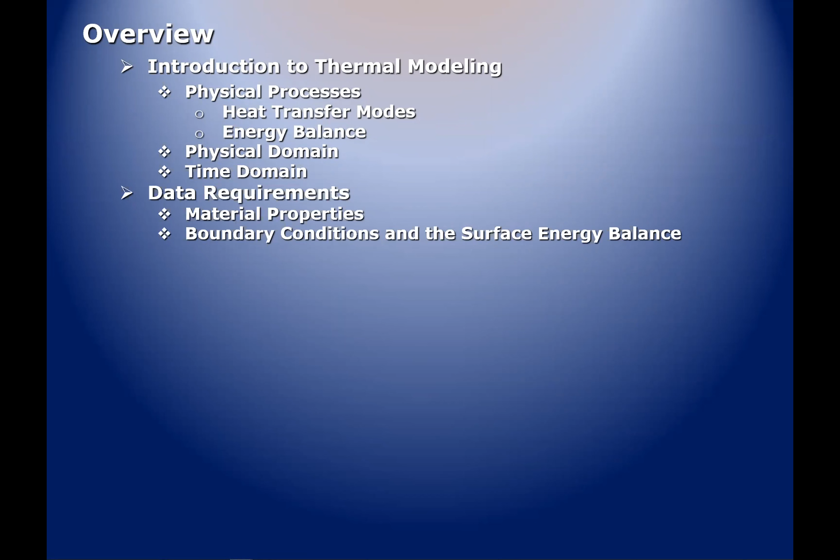Then we'll move on to data requirements. This is important from the designer's perspective, because you can't send a consultant off to do modeling without the appropriate background information, and sometimes that can take quite a bit of effort to acquire. Both material properties and meteorological data may be needed if you want to do a comprehensive modeling study of a particular site or portion of the roadway you're designing.

We'll talk about a couple different versions of modeling that are available, starting with some analytical modeling, which may be appropriate for simple analyses, including the basics of the Stefan and Neumann curve solutions, and then one method that has been a standard DOT has used in the past, known as the modified Berggren method. I'll talk a little about the background there.

Then we'll move on to numerical modeling, both 1D and 2D. I won't talk much about 3D models, other than when they might be appropriate, although those are typically difficult to complete and very time consuming. We'll talk a little about modeling advection or convection, such as occurs when you have groundwater movement, or particularly air movement in an ACE embankment that Billy mentioned in the introduction.

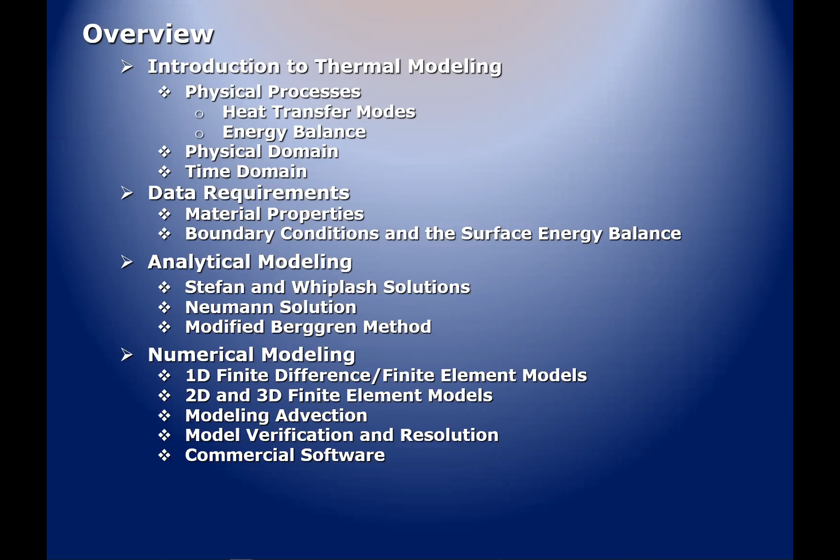And then questions about verifying software results and resolution, and I'll mention briefly some commercial software that has been looked at. And then finally, some real world challenges: materials and uncertainty in boundary conditions and initial conditions.

So a quick background in terms of thermal modeling. These are the three fundamental physical processes that one has to be concerned with when modeling heat transfer in a roadway embankment type situation.

Typically, heat transfer in soil and gravel systems is dominated by thermal conduction. Exceptions do occur, as I mentioned briefly, when you have a moving fluid like pore water or potentially pore air in the case of an ACE embankment, and that can complicate the modeling tremendously. Most of the simple methods and most simple numerical codes typically use thermal conduction as the primary heat transfer mechanism in soils, sands, and gravels, and that's largely acceptable and accurate, again excepting only those conditions when you have some sort of moving fluid to deal with.

In addition to thermal conduction, there are two other fundamental heat transfer mechanisms that have an impact, and that is thermal convection at a surface and also thermal radiation. In this slide, the convection and radiation terms are really in the context of a surface interaction. So for instance...

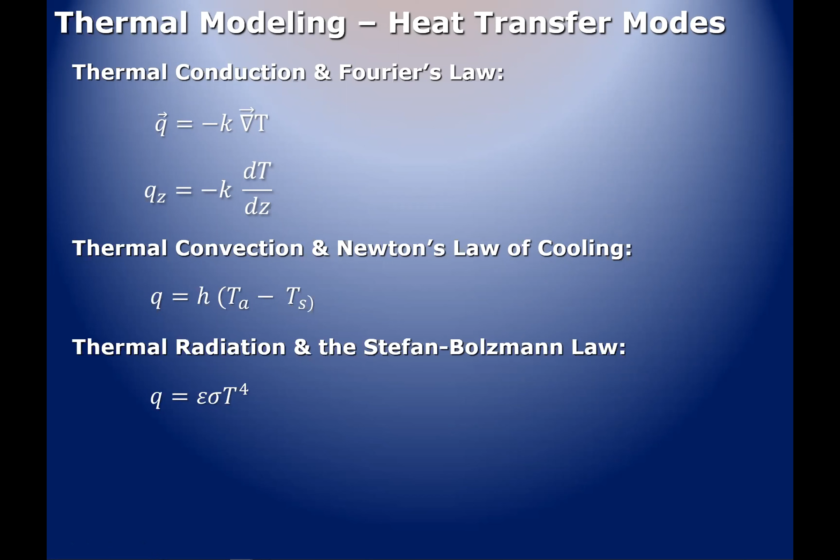Obviously the larger the net heat flux, the larger the change in temperature is going to be. The larger the heat capacity, however, the smaller the change in temperature will be. Heat capacity is just the physical measure of how efficient or effective the material is at absorbing thermal energy. Something really effective at absorbing thermal energy may take a lot of energy without changing temperature very much, so it's sort of like a thermal battery.

The ability of materials to store heat is really a function of 2 types of heat capacity: a sensible heat capacity and a latent heat capacity. Sensible heat capacity is associated with raising the temperature of the material, whereas latent heat capacity is energy associated with either freezing or thawing the material. If we're considering a soil matrix with moisture in it, both the water and the soil particles can change temperature, so they both have sensible heat capacity. But only the water in the matrix can freeze or thaw, so only the moisture portion has latent heat associated with it.

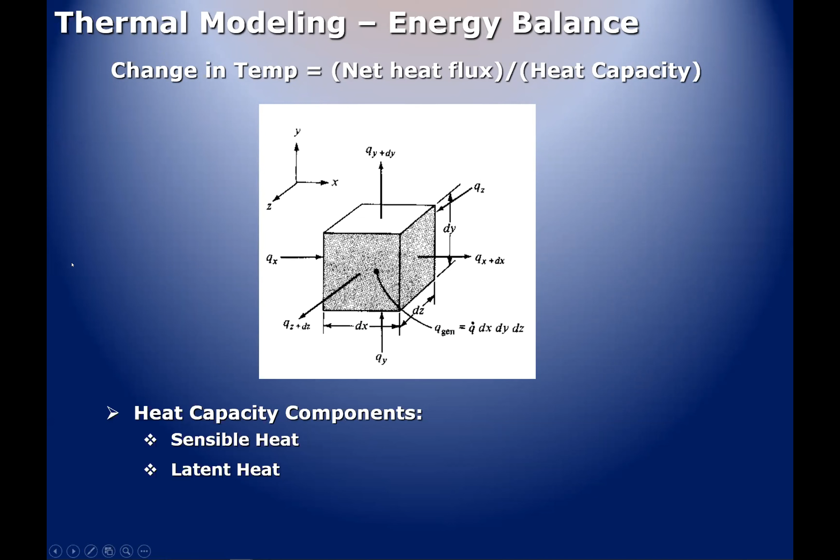So the fundamental background of modeling is that you take those heat flux relations, like Fourier's law of heat conduction, carve out a representative volume of the material, and perform a balance on it. That results in a set of equations that you can solve for the temperature of these control volumes as time goes on.

Depending on the result you're trying to achieve or the analysis you're trying to obtain, it may be most advantageous to conduct a simplified one-dimensional simulation. For the most part, roadways are represented by two-dimensional geometry. Typically, if you look at the importance of heat transfer in the various directions, the most important and most vigorous heat transfer occurs in the vertical direction.

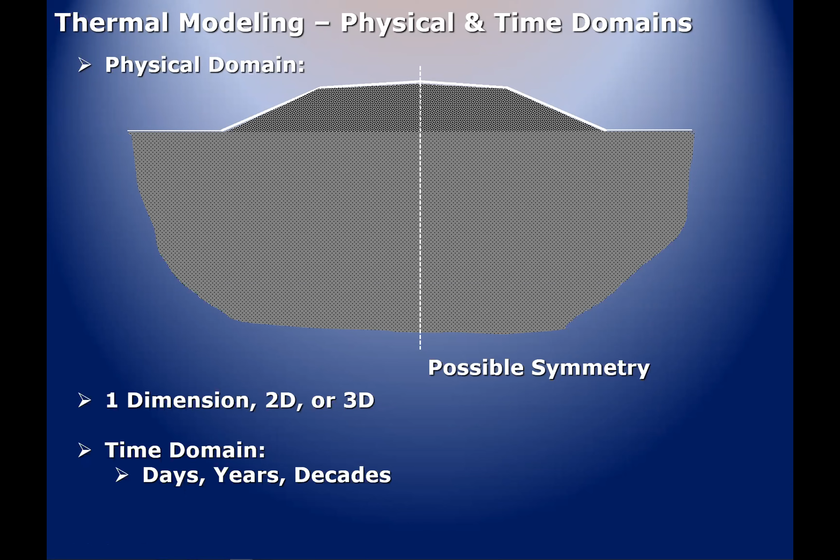If you have good information on dry density and moisture content, coming up with thermal properties is relatively straightforward. But that's something the designer has to think about: what types of material properties are really available, and whether we need to do more sampling of the site, because these material properties are needed not only for the embankment materials, but also for the underlying foundation soil materials.

Once the soil dry density and moisture contents are known, sensible and latent heat capacity calculations are relatively straightforward. Modelers can easily calculate that, so long as they have an idea of what types of materials are within the embankment prism and below it, and what moisture situation you're dealing with.

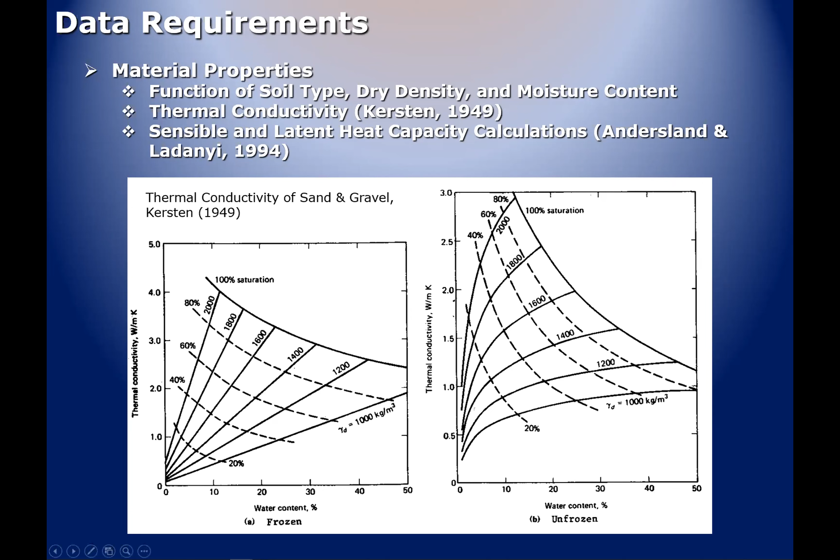The other set of data requirements has to do with boundary conditions. The most complicated boundary, of course, is the upper surface boundary. Here's where some of those heat transfer mechanisms I mentioned earlier play a huge role. Probably the combination of radiation is the most difficult to deal with.

Hot objects generate shortwave radiation, so from the sun we have incoming shortwave radiation. Some of it may be reflected by clouds, and some reflected once it hits the surface, but quite a lot of it will be absorbed. If you have a black asphalt coating, for instance, we all know that a hot summer day will generate quite a bit of heat as the sun's shortwave radiation is absorbed by the asphalt.

On the other hand, the asphalt also emits longwave radiation. So there's a complex play between incoming radiation from the sun and outgoing radiation from the surface of the roadway that results in what I'll just call net radiation - a balance between what's coming in from the sun and atmosphere, and what's being emitted by the surface of the road.

In addition, we also have the convection term I talked about before. For instance, if you have a lot of sunlight on a very warm day, you may have very high asphalt temperatures. But if you have a cool breeze, that wind will carry away a lot of the heat, so it may not get into the embankment or underlying foundation soil.

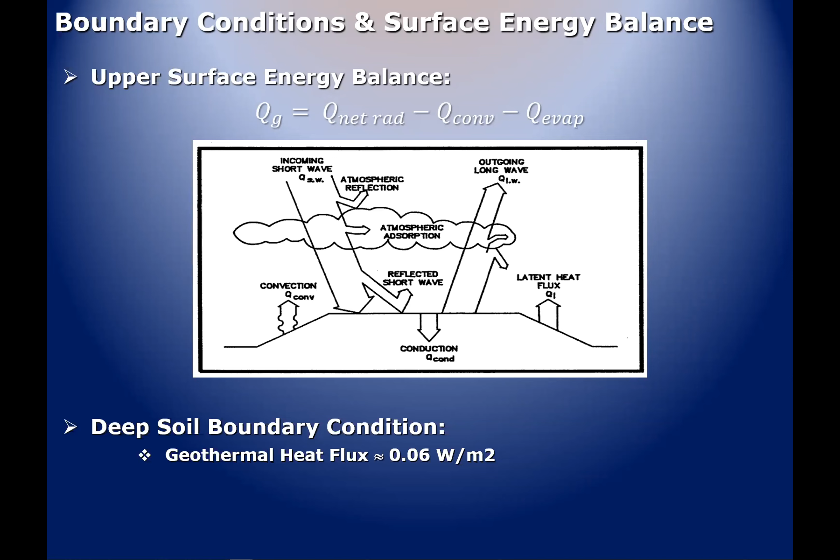However, you'll find that most of the time you won't have enough data on the surface energy balance, and most of the time the accuracy you need won't justify either gaining all that meteorological data or using it in a modeling effort. So most of the time, modelers will use a simpler surface energy balance approach known as the N-factor approach.

Many of you may have heard of this. Most of the time, modeling efforts will use freezing and thawing N-factors to characterize what's going on at the surface of the ground or the surface of the embankment.

I won't say a lot about these, but essentially the N-factor is a way of converting air temperature conditions to surface temperature conditions, using an air freezing index, for instance, on the freezing side. Knowing an air freezing index, which is the number of degree days below freezing that the air temperature maintains, and a freezing N-factor, we can calculate what's going on at the upper surface of the embankment or soil.

The same thing is true for the thawing season. Knowing the air thawing index and the thawing N-factor, we can calculate what's going on at the surface. You can imagine that for an asphalt surface during the summer, because of solar input, as we discussed before, you'd expect higher temperatures at the surface of an asphalt layer than for just the surrounding air.

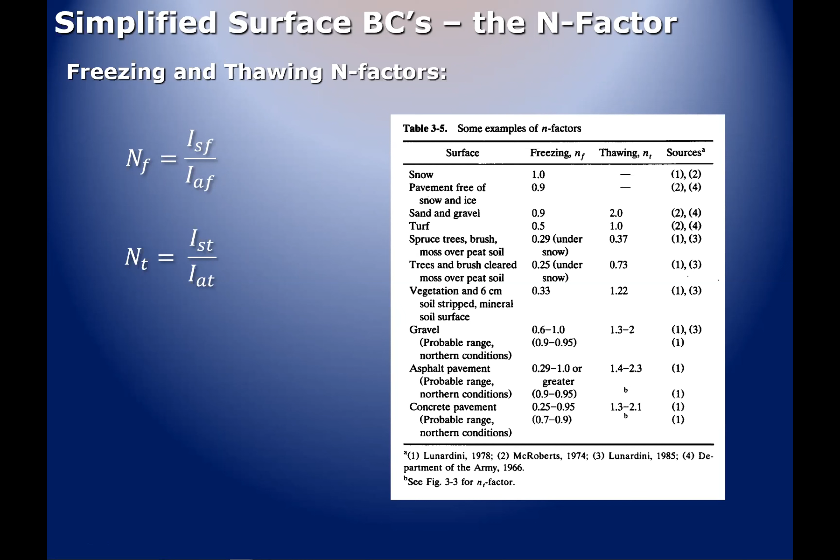So let's move on and talk a little bit about some simple modeling techniques. The first solution I'll talk about, which you've all seen pictures of, is something known as the whiplash curve solution. In this case, it's just a one-dimensional solution.

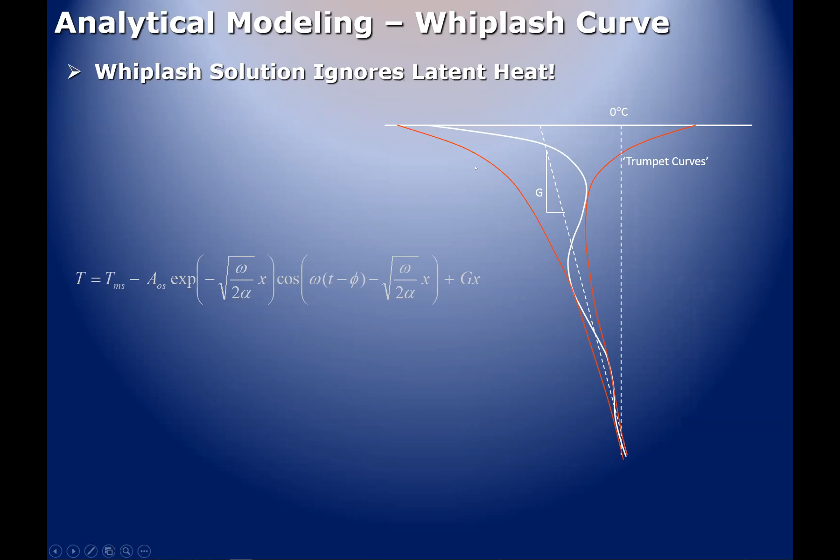So there is a mathematical solution so long as freezing and thawing are not important. The only time freezing and thawing aren't important is if there's essentially no moisture in the material. So for very dry materials, perhaps a dry bedrock, something like that, the whiplash curve may give you reasonable results in terms of annual behavior of the temperature profile.

Another extreme is known as the Stefan solution. Whereas the whiplash curve solution ignores latent heat, the Stefan solution ignores sensible heat. It essentially assumes that the material is not changing temperature, it's only freezing or thawing. Based on that assumption, you can come up with a relatively simple estimate of either the freeze or thaw depth.

So if it's a very wet material you're dealing with, for instance water, the Stefan solution can give you a pretty good estimate of, for instance, the depth of ice formation on a lake. Because the amount of energy removed from the surface of the lake to the ambient air, almost all of it goes to creating ice, very little of it goes to cooling off that ice. So the Stefan solution is a pretty good solution if you have a very wet material, or you're dealing literally with 100% water.

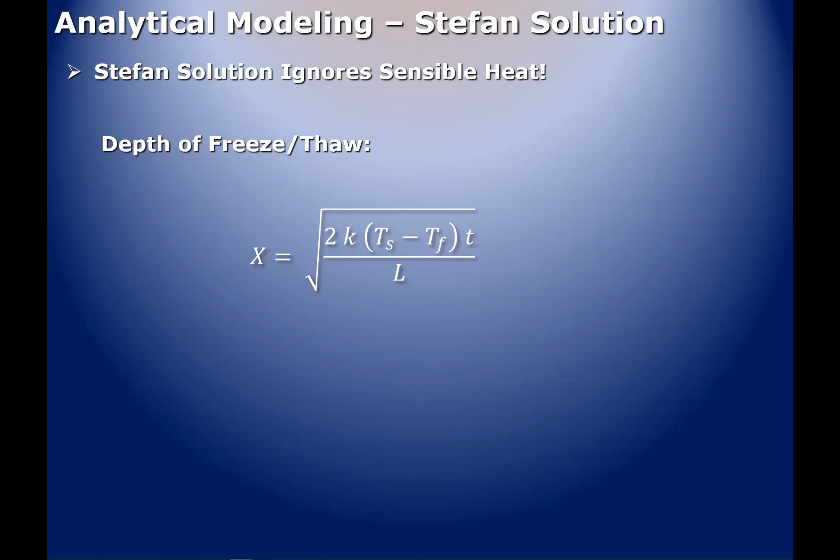Neither of those approximations are typically true for soils. Most of the time you have some water, not zero and not 100%. So most of the time for soil modeling or embankment modeling problems, both the latent heat and the sensible heat play an important role.

There's one analytical solution known as the Neumann solution, which actually includes both. It's very complex mathematically, involving the use of an error function, which arises from mathematical theory for solving these equations. It's also relatively simple in that it assumes the initial soil column is all at one temperature, say T0, maybe above freezing.

At the beginning of time, we suddenly lower the surface temperature to some fixed value, T surface. As time progresses, since the surface temperature is below freezing, you get a freezing front progression with time. The Neumann solution can tell you exactly what these temperature profiles look like, but only for the simple case where the surface temperature is fixed.

Which of course is not what we have in the real world. Typically temperatures vary from hour to hour, day to day. In wintertime generally they're below freezing, but not fixed like this. So the nice thing about the Neumann solution is that it can be used to verify numerical models that include freezing and thawing, making sure your numerical model captures all the important parts of these problems.

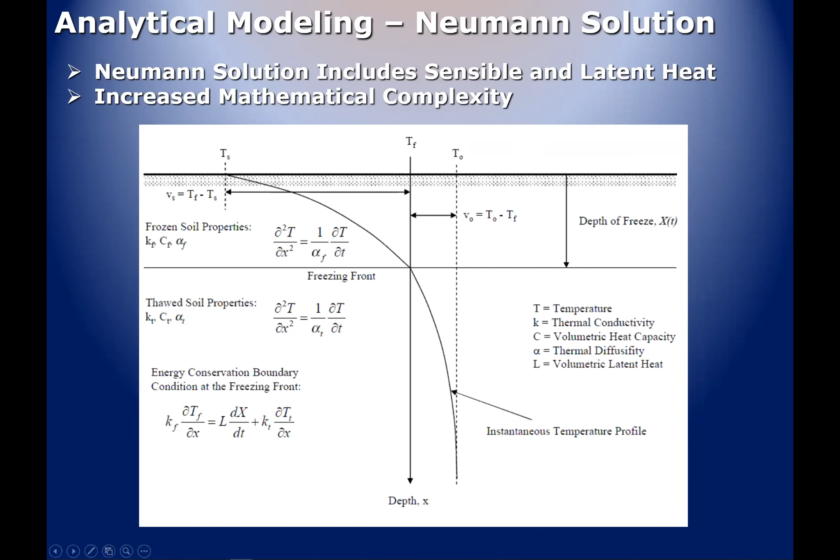The one that's been practically used by DOT in the past, and maybe after I'm done Billy can chime in on whether this is still available - I know for a while DOT had a program called ModBerg. The modified Berggren method is essentially a layered version of the Neumann solution.

It does include both sensible and latent heat, so cooling and warming of the soil, and freezing and thawing. It's used for calculating freezing or thawing depths in layered systems like you have in a roadway embankment problem - gravel, D1 gravel, silt layers, etc., maybe even an insulation layer.

So it's well suited for roadway embankment problems, and it can be implemented in a spreadsheet. This would be a relatively simple modeling effort that a modeler or consultant could do quickly, if all that's needed is a freezing or thawing depth analysis, and you and the modeler are convinced that a one-dimensional analysis is appropriate for the conditions.

For instance, you're not worried about what was happening at the center line versus what might be happening at the toe of the embankment slope. That would probably dictate a two-dimensional analysis.

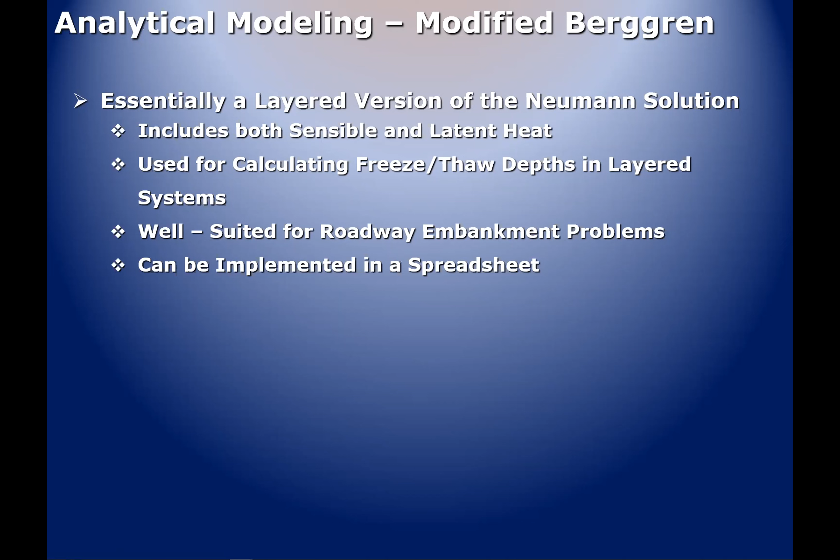Moving on to numerical modeling - I've got just a couple more slides left, so we're getting close to the end. Numerical models are available in 1, 2, and 3 dimensions.

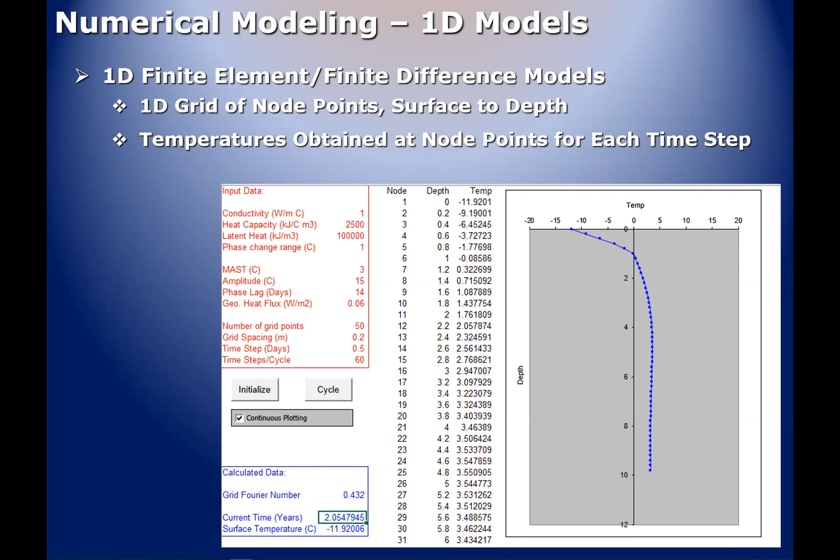These models can include detailed thermal properties, boundary conditions, and initial conditions. As I said earlier, the commercial codes even include the ability to do a full surface energy balance if you have the data to support it.

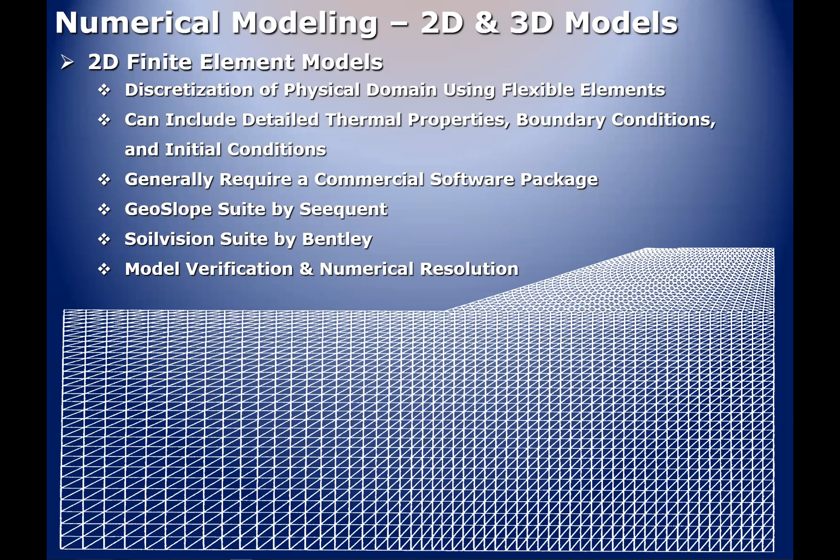If there is important advection going on, you not only have to solve for the temperature field within the embankment and underlying soil, but also for the motion of the fluid. That is challenging. It can be done by both SoilVision and GeoSlope's TEMP/W, but it requires additional information about the material properties and the potential driving the fluid motion. So that's a real world challenge for sure.

A second challenge is accurate knowledge of material properties and possible heterogeneity of the materials, as well as the fact that moisture contents may change over the annual cycle. Really accurately characterizing materials is a big real world challenge, and if you're way off on material properties, you'll likely be way off on temperature predictions and freeze-thaw predictions.

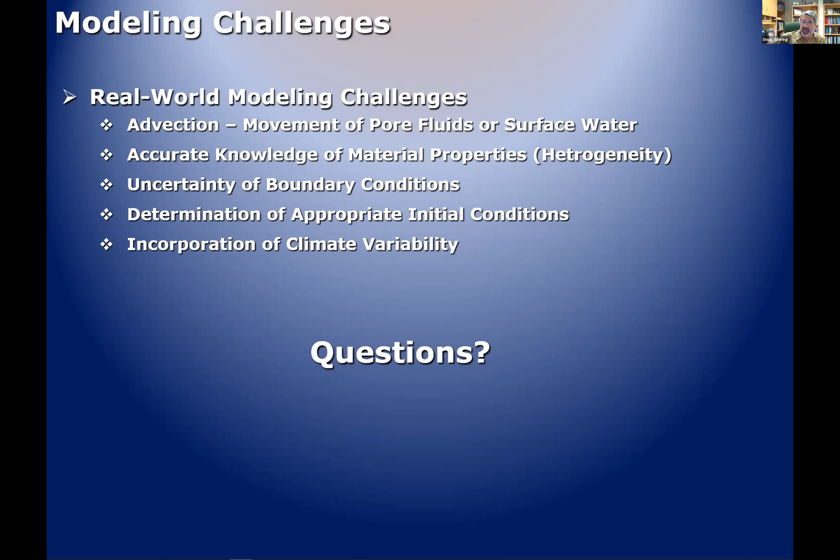Well let me just say, as Billy said at the beginning, I'm here in Fairbanks. I'm retired. I'm happy to connect with any of you who have questions about Chapter 4 or about thermal modeling. Please reach out and feel free. Thanks. Okay, thank you, Doug. And as Doug says, he's certainly available to you if you need, and he does occasionally do projects for DOT. I think he's got one going now on ACE.

Uh-oh. You clicked off for a second, Billy, but I can hear you now. How about now? Yeah, you're kind of... I got to restart. Okay, am I back? Doug, can you hear me? Yeah, you're back. Okay, some reason or another my Zoom decided to quit me.

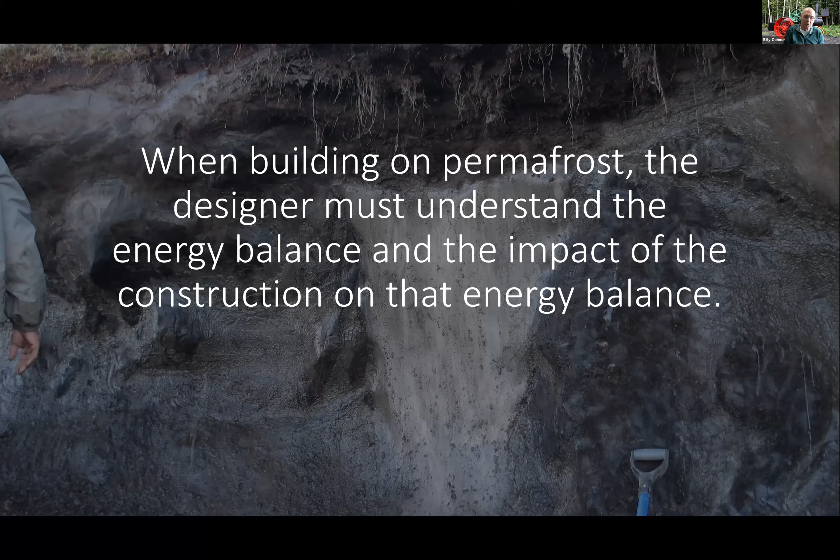So Chapter 5 is really talking about design alternatives. I'm not going to go into great detail on all of these, but I'm just going to give you a sense of some of the options available to you, perhaps when you might want to think about using those techniques, and when you may possibly even want to avoid them. There really are only a few options that are available to you.

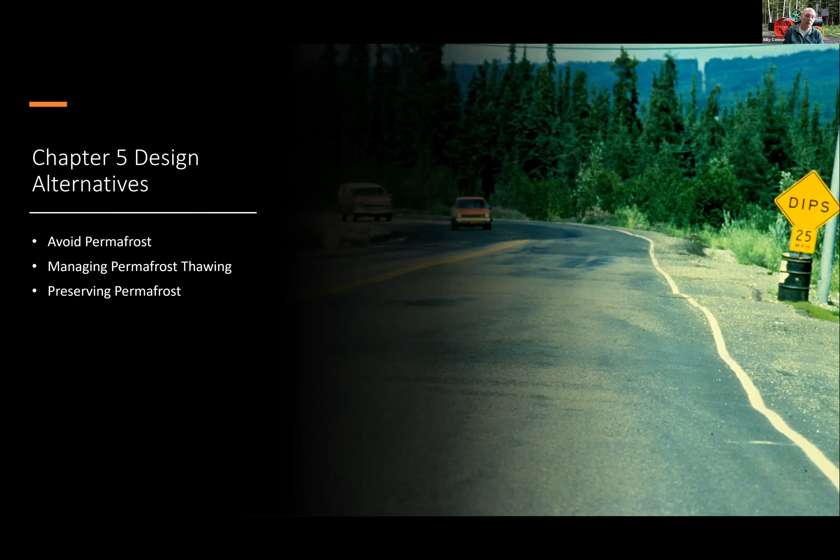One is to avoid the permafrost altogether, which is probably the best one. You can also manage the permafrost thawing in several different ways, or you can try to preserve the permafrost. We'll be talking about each of these in a little more detail as we go along. Which one should you choose of those three?

Well, the policy of the Alaska DOT, going back to the 1900s actually, has been to avoid permafrost whenever practical. Fully recognizing that there are competing requirements such as grade, sight distances, and all of those kinds of things. But when you can, try to avoid it.

Managing the thaw is attractive in warm permafrost, such as around the Fairbanks area and south, pretty much anything south of the Yukon River on our primary network. That is a good choice, where the mean annual surface temperature is above freezing.

Doug talked a little bit about the surface temperature and how you might get to that. But it's important to recognize that if you're in those conditions, and especially when you start adding the increases in temperatures we're seeing in our climate these days, when you're at or near that point, you probably want to really start thinking about managing your thaw.

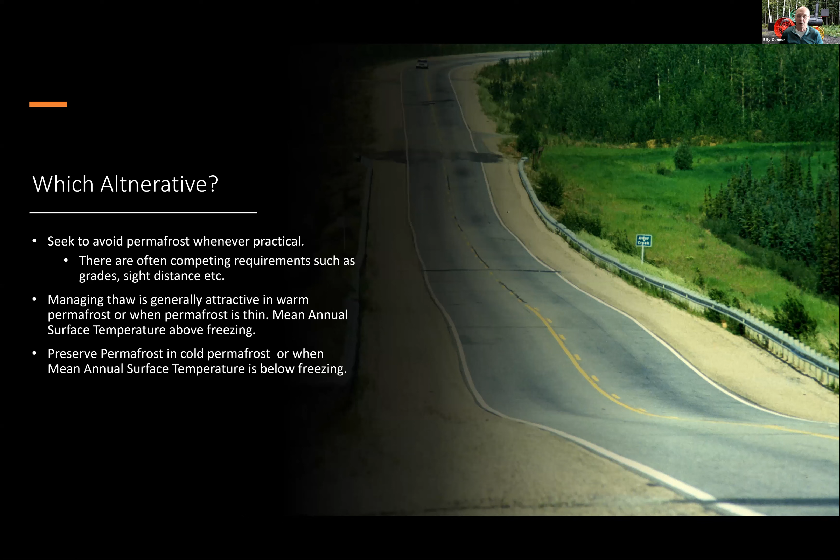And then preservation of permafrost—anytime you're in cold permafrost, or when the mean annual surface temperature is below freezing, that may be a point in time when you can consider trying to preserve the permafrost. Again, we'll see in chapter 10 that the climate is changing, but hopefully in that chapter you'll start getting a sense of what tools are available to take that into account.

Avoiding the permafrost is not a new concept. When the Richardson Highway was realigned during 1910, Wilds Richardson was in charge of that, and that was a primary consideration. Wherever they could, they went out of their way to try to avoid permafrost, recognizing that if they didn't, it was going to be problematic for some time to come.

In the 1900s, when the Alaska Road Commission was established, they also put it in their policy that they would avoid permafrost whenever practical. It was written policy, and for all practical purposes, I guess we could say that's still very much in effect.

One of the things I'm seeing occurring more and more is the desire to upgrade our roads and airports, and try, in many cases, to look at relocating those. Just be careful when you do so that you do it with forethought, especially if you're moving off of low ice content, no permafrost, into permafrost—you may want to carefully think about that and the impacts it may have.

In general, if you're building on stable permafrost, and there's a little bit of discussion about that in chapter 2, that's probably going to be okay, but make sure you really know what you're getting into as a part of that.

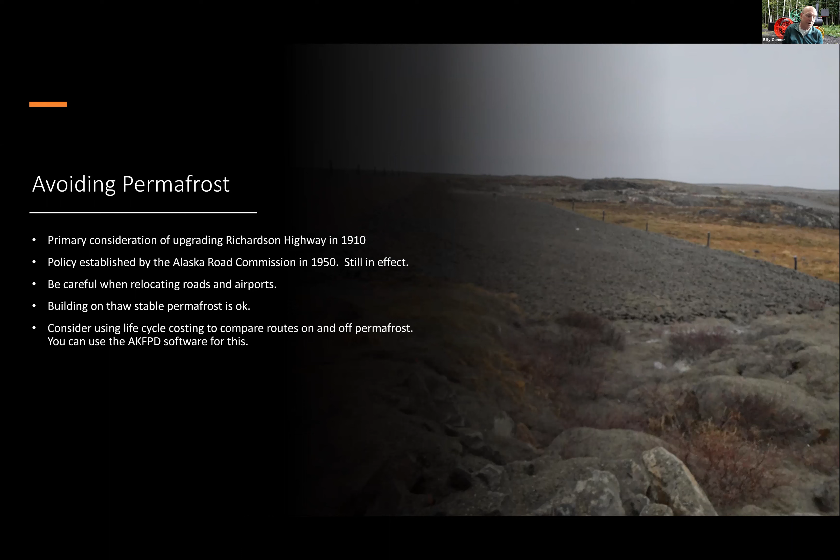Interestingly enough, those of you who have taken the pavement design course from us a few weeks ago, or some of you probably a year ago, there is a life cycle costing software in there that can help you through that maze of whether it's really cost effective to move routes on or off the permafrost. That tool is available to you. It's fairly easy to use, and certainly could give you some insights into the cost of moving the roadway.

We can also accept the consequences of thaw. First, there's no way that we can totally avoid permafrost, especially as we move north where we get into continuous permafrost. So we need to be able to understand the consequences of moving onto permafrost and be able to address those issues.

It's not always practical to construct preservation features, such as subcuts or pre-thawing. When I say subcuts, we're trying to remove the permafrost entirely and go that route, or pre-thawing may not be practical. So if you're rerouting, carefully evaluate the in situ soils and know what you're getting into as you move forward. Techniques to minimize the impacts.

Just because you can't keep the permafrost frozen, there are some things you can do to minimize those impacts. Those include minimizing disturbance of vegetation—we'll go into that in a little more detail—and hand clearing for sight distances, and we'll talk about the impacts of that.

We always want to minimize the disturbance of drainage patterns because of the advections that Doug was talking about a little bit earlier, and we'll talk about that in more detail. And when possible, we absolutely want to minimize the disturbance of the existing embankment, especially if it's frozen, because you could disturb the balances established over many decades. So if you can, don't dig into the embankment any more than you need to, especially if it's frozen.

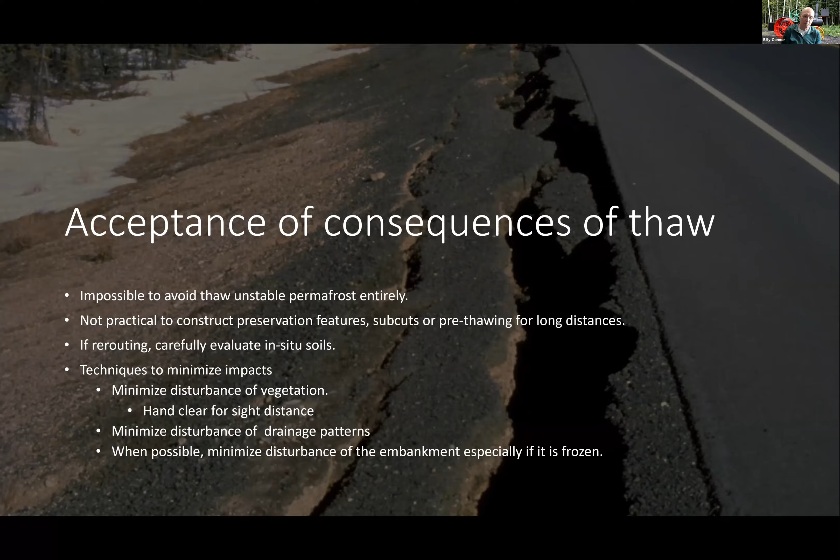Another option for us is to use geosynthetics. There are two popular methods: one is what people often call a pillow wrap, depicted in the lower right-hand column, where we lay it out and wrap it over the top. The idea is to maintain the core of the embankment in good stead and let the side slopes go as they will. The other method is sometimes called the phone book method, where you lay the fabric out straight without wrapping it over the top, usually taking it out a bit further so you can get tension.

In both cases, you're depending on the tension of the installation being developed, so you want to put it in tight, and you typically want to use a fairly high modulus or fairly strong material in that application.

Geosynthetics work very well as a separator to keep fines from mixing into the coarse grain materials on your embankment. DOT uses a tremendous amount of fabric for that purpose. It also minimizes longitudinal cracking and lateral spreading, but it's been shown to be ineffective at reducing vertical displacement. So if you're trying to reduce vertical displacement, it's probably not going to be too effective, but it will help with lateral spreading. Be careful as to the application.

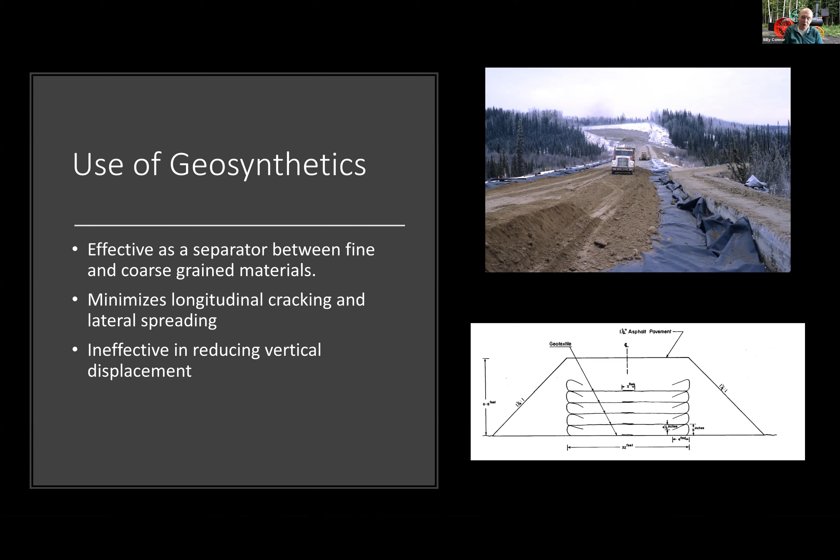We've had a few applications where it did not work very well. I was called out to Kivalina one time where they were building a new runway using geosynthetic. Whenever a piece of heavy equipment went across it, it would blow up like a balloon and pop, and a wet, gooey mess would fly out. We found that the geosynthetic was holding the water down, so we ended up ripping the fabric out, letting it drain, and then completing the runway. It's performing well now, but geosynthetics can do harm.

Pre-thawing has been used in a few cases in the Fairbanks area. Some roads south of town have used pre-thawing on occasion, and it works well where you've got warm permafrost, such as in Fairbanks, and where the permafrost is relatively thin. In cases around here, we sometimes only have a few feet of permafrost, so pre-thawing works out pretty well.

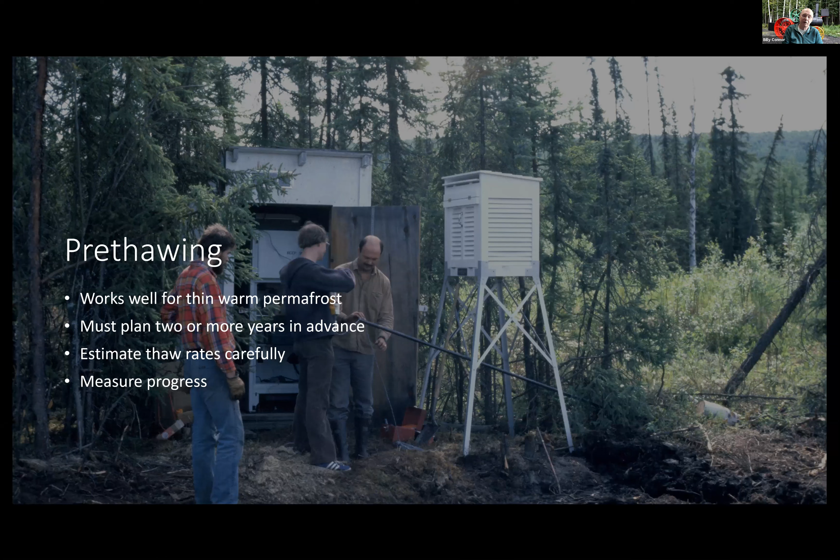But you do have to plan two or more years in advance to make that happen. So it's a good idea before you decide to go that way to estimate the thaw rates carefully. If you proceed that way, you might want to put in some thermistors so you can measure that progress. But it is an effective way, and in the Anchorage area it might be effective for you as well.

There are shoulder modifications you can do if you're going to allow it to thaw, such as stabilization or toe berms. I spent a lot of time trying to figure out why the Canadians were having good luck with it and the Alaskans were not having very good luck with it.

After I took a few trips with the Permafrost Working Group supported by Transport Canada, I realized that the Canadians tend to use it more in cold permafrost areas, whereas we in Alaska have tended to use it in warmer permafrost areas. So I realized it works well where you've got cold permafrost, such as north of the Yukon River, and poorly where we have warm permafrost.

This photo shows a lot of water and a big thermokarst at the bottom. This is a section at Alder Creek, just south of Fairbanks. If you look to the left, you'll see a pipe sticking out - that was an old air convection culvert that used to be about 10 to 12 feet above the surface of the surrounding terrain. Over time, the snow thrown out there due to road clearing raised the mean annual surface temperature. We measured the mean annual surface temperature on those toe berms to be about 37 degrees or more.

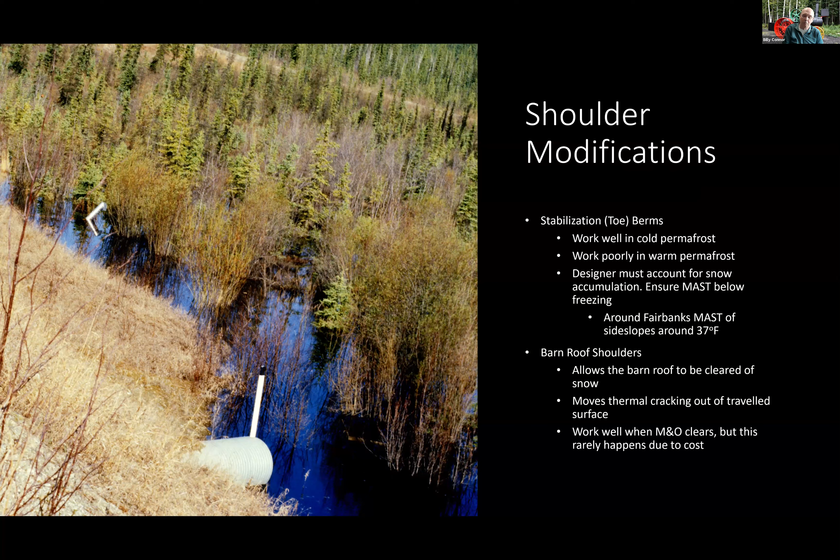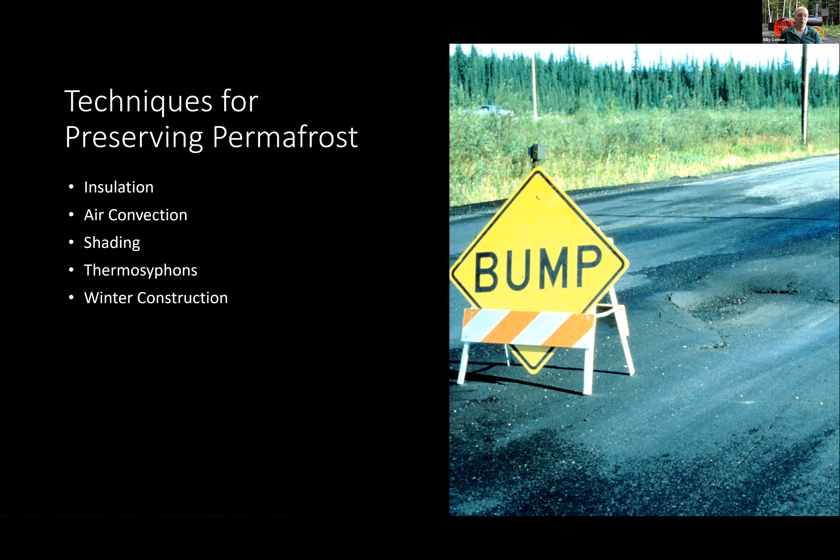There are a number of ways that we can preserve permafrost. I've listed these in kind of a generic type of listing. Insulation, which is probably the most common of those. The second most common is probably air convection. Most of you know about air convection or ACE, air convection embankments, but there are a couple of other techniques being used. Shading works out really well, because if you look at the solar input, that can be degraded, eliminated, or reduced. Thermosyphons are occasionally used. And of course there's some things we can do to try to use winter construction to help preserve that permafrost.

So insulation, there are really two types of insulation. Each of them have their pluses and minuses. Extruded insulation - those are the ones produced by Dow Chemical and Owens Corning. There was a third for a while. Dow is usually what we call the blue board. The pink board is Owens Corning, and there was someone making a yellow extruded for a while. I haven't seen that in a long time, but if you run across that, you can usually tell what that is. The advantages of the extruded: it absorbs less water than the expanded, and it's also less sensitive to water content just because of the way the air voids are produced in there. Over the long run it typically has a bit higher R value, but it is more expensive, so you kind of have to trade that off.

The expanded is less costly - that's one of the advantages. Another advantage is it's made in Alaska, so you don't have the large shipping costs to get that up from the lower 48. But it does absorb more water over time, and there are several reports out that confirm that.

If you really want to know about those, I put out a report a couple of years ago. Dave Esch put one out in the 1980s, and the folks over in Ottawa, Canada put one out about 10 years ago. They all have very similar results, though they vary a little bit in the details, but all in the same trend - about 25% lower R value over time. So most people right now are using the published R values of these products as they exist on the shelf, but I would encourage folks to start thinking about using the in-service R values instead. That will give you probably a better indicator of how well these insulated materials are going to work.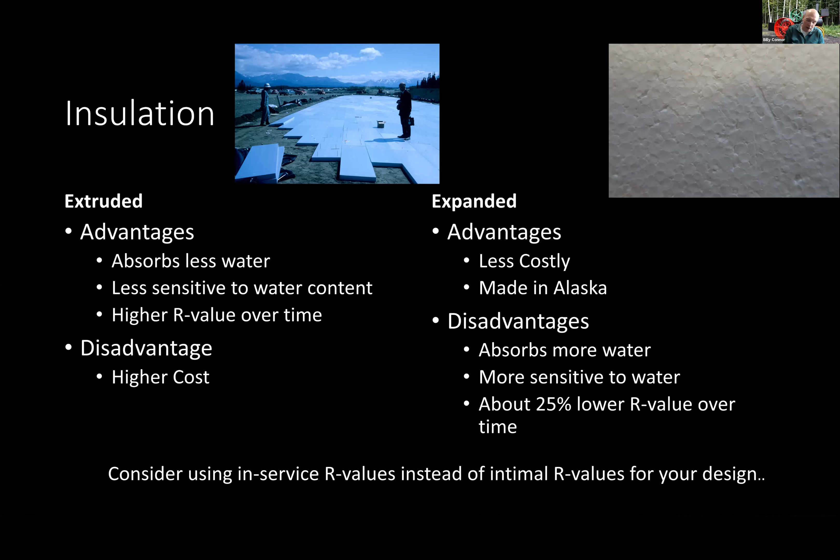So where do we put the insulation? I've talked about that, and Doug and I had many discussions on that. And what we basically came up with is just that you won't put hot and cold foods in your cooler - you really shouldn't put both hot and cold soils beneath the insulation. Think of that insulation as kind of a big cooler. I wouldn't put my hot lunch in with my cold drinks and the ice in that cooler. I'm either going to put hot stuff in one cooler and cold stuff in another. So one of the things you want to look at is when you're going to be doing your construction, and you really need to carefully consider when you're going to put it down, do your construction, and why you're going to do so.

If you're going to be doing it in the summer, you probably want to put the insulation closer to your permafrost. You want to put the insulation down near the permafrost, but you don't want to leave the permafrost exposed.

You don't want to leave it exposed more than a few hours. You want to get down to it, put your insulation down, and start getting it covered as quickly as you can.

Even better, in order to avoid the problems you'll have with potentially thawing the permafrost, is to do it in late spring or early fall, or late fall and early spring, sometime in the spring and fall, in order to minimize the warming of that permafrost. So you really want to minimize that.

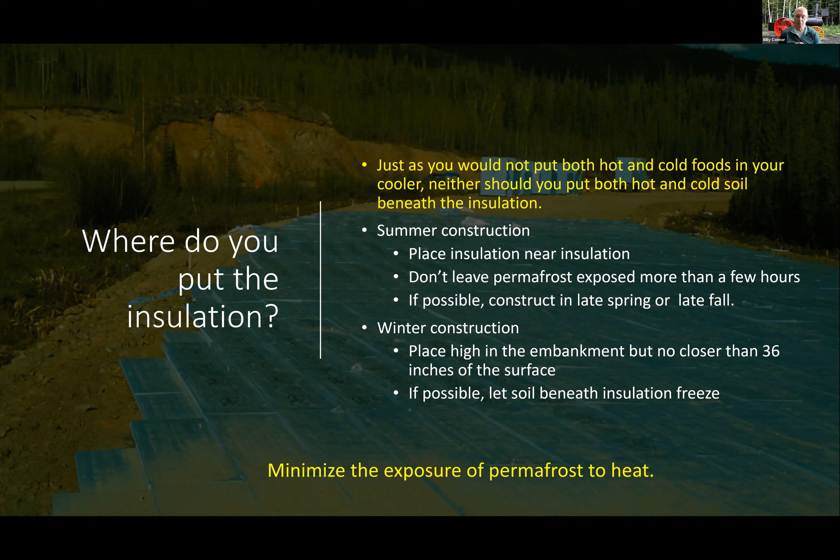But the thing you really want to concentrate on is that last bullet at the bottom, the yellow one, which says you want to minimize the exposure of the permafrost to heat. That is really what you're looking for in order to try to maintain the permafrost beneath your insulation.

Use of air convection. Right now there are really three types of convection that people are using. The air convection embankments, I'm just going to hit the highlights. If you really want to know the details, get a hold of Doug. In fact, if you want to know the details of any of these, Doug is very adept at running the models for you and helping you understand those. I understand them more from a conceptual viewpoint, and I can give you information about how well they work.

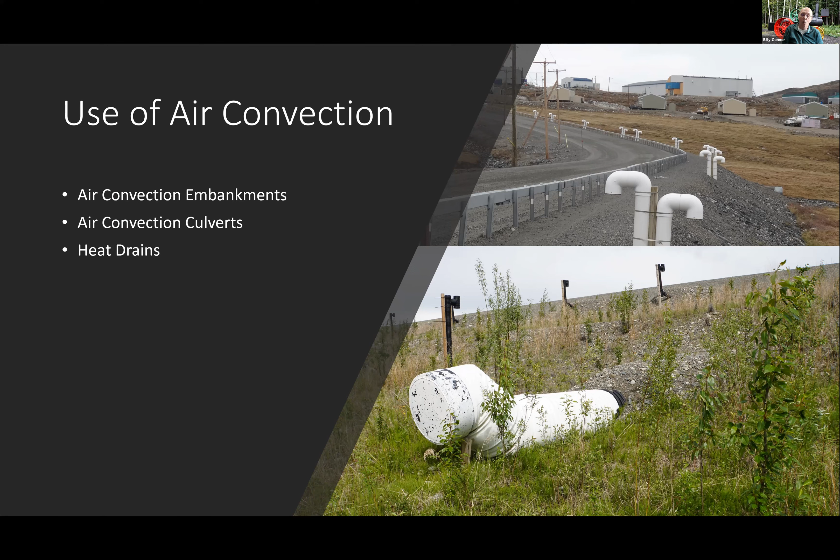Air convection embankments, which most of you are familiar with. The air convection culverts, shown at the bottom, I'll go into more detail on those. And at the top, there's something developed by Guy Doré over in Canada, which he calls a heat drain. They all work in a very similar manner.

They're using air convection to cool the embankment. Air convection embankment, as you see in the bottom right there, basically what's happening is the ground is heating the air in the coarse rock that the embankment is made of. That causes convection cells to be produced, and that heat is released to the surface of the roadway, and as a result you're getting good cooling.

Even in the warm areas around Fairbanks, the air convection embankment that Doug is monitoring up on the university campus on Thompson Drive, we're still getting cooling after all these years, even though we've had a few warm years recently. So that's working well. There's another way to do it.

That's called the ventilated shoulder, which is in the top right. Basically it's using the same pile of rocks, but we don't put it on the interior of the embankment. We're using it to cool the slopes of the roadway. One of the issues there is there's a tendency for air and wind to blow through there and cause some issues.

Billy, I'd just add one quick comment here too. In your note there it indicates a 5-foot minimum, but we've been doing experiments on that, and I would say the jury is out in terms of how thick those ventilated shoulder layers need to be. Maybe as little as a few feet might work in some cases. So the jury's still out on that one.

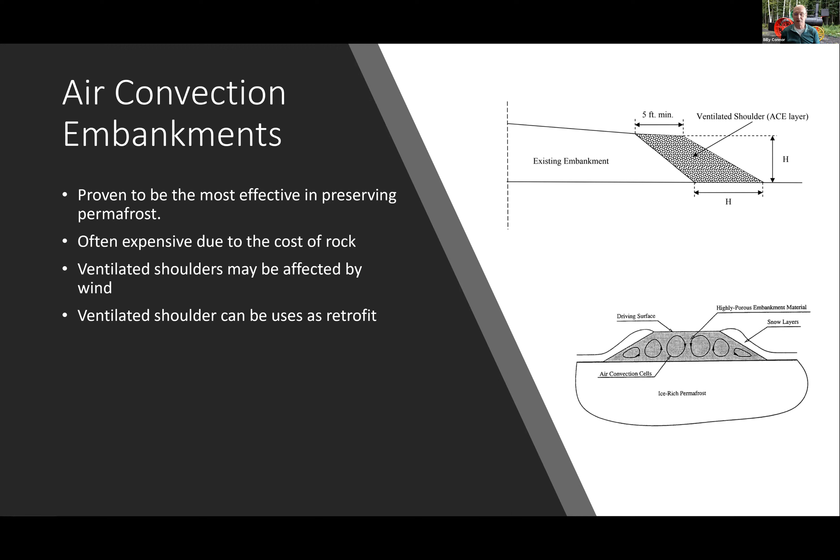Okay, thanks Doug. That comes from a little bit of an older publication. But as I say, these things have proven to be most effective of all the techniques we have in preserving permafrost. But it is expensive where you don't have rock, because getting rock can be very expensive for us. And ventilated shoulders, as I said, may be affected by wind. I like the ventilated shoulders because it can be used as a retrofit, although I've only seen that done in a couple of applications.

Air convection culverts.

We have used those a couple times within the state, and the Canadians are using them on a few occasions. They really work very much the same way as the ventilated shoulders.

If you look at the graphic on the lower right, the air comes into the culvert and is warmed by the ground, then exhausted by the chimney. In the upper right picture, the far culvert is the entrance, the near culvert at the top is the exit, and the near culvert at the bottom starts the next cycle. Works very well for cooling the shoulders.

It does nothing for you in the center, but it does cool the shoulders very well. Relatively inexpensive. The first ones we used metal pipe, but most applications now use plastic pipe, so it's much easier to put in and much less expensive.

One of the keys is to put it high enough that you're not going to get water in the bottom of it. That was the mistake we made on the first couple we did—we didn't get it high enough in the embankment. They will cool about 4 feet around the pipe itself, which gives you some idea of the area of influence. You'll also notice there's a cover on the front of the lower ones, to keep air from coming in during the summer months, especially in windy areas.

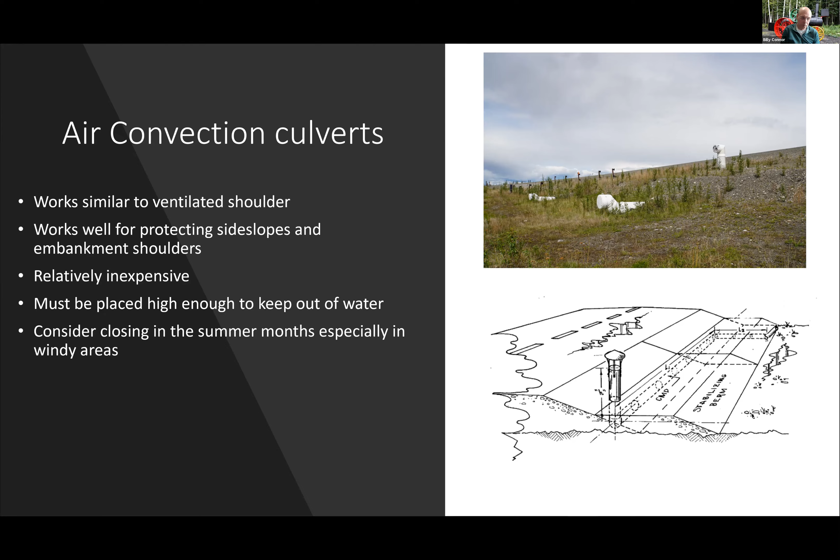Heat drains are very much the same concept, except we're using geosynthetics with an air gap between them, which are commercially available—often used as vertical drains. If you were looking for them, look for vertical drains. You can see the pipe with the blue arrows: it goes in, the ground heats the air, and due to convection it rises and is exhausted through the other pipe.

The right-hand picture is a photo I took in Salluit up in Nunavik, in the Canadian provinces, and that one's worked pretty well. There were a couple others put in, one at Beaver Creek. One issue there was again not getting it up high enough to get it out of the water, so it ended up plugging up. Same kinds of issues with all three of these—make sure you account for the water in there.

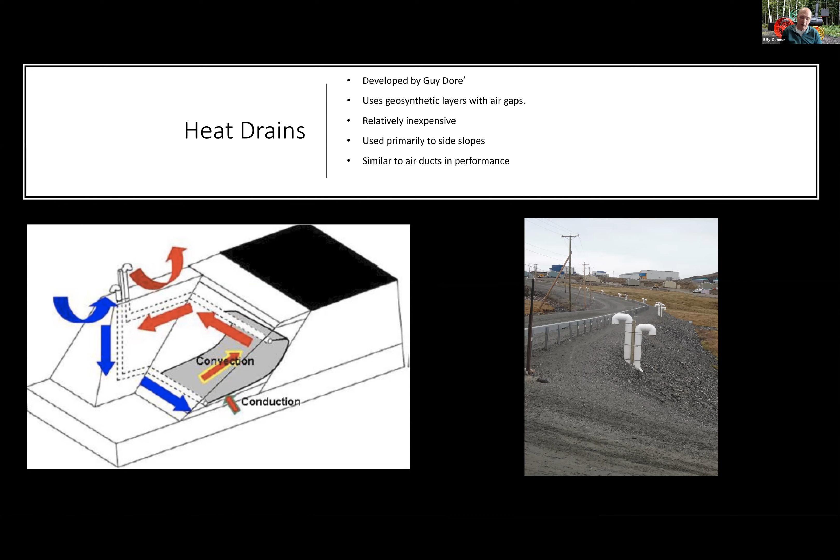All we're doing is putting shade over the shoulders, which causes it to cool. But the neat thing is that in wintertime, because the snow is held up off the surface, air is able to flow underneath these snow sheds and cool the ground there. So they really work pretty well in both summer and winter.

We've seen on the side slope at Beaver Creek that the mean annual surface temperature has been reduced from 39 degrees F down to 28 degrees F. That's a substantial cooling, and it certainly reduces the amount of thaw settlement in your shoulders, which often shows up as longitudinal cracks in the travel way.

We've had discussions a few times about this with folks in the DOT traffic sections, and they're concerned about these things being within the clear zone, so they typically require guardrail in those areas. The Canadians did not. So it's just something to be aware of.

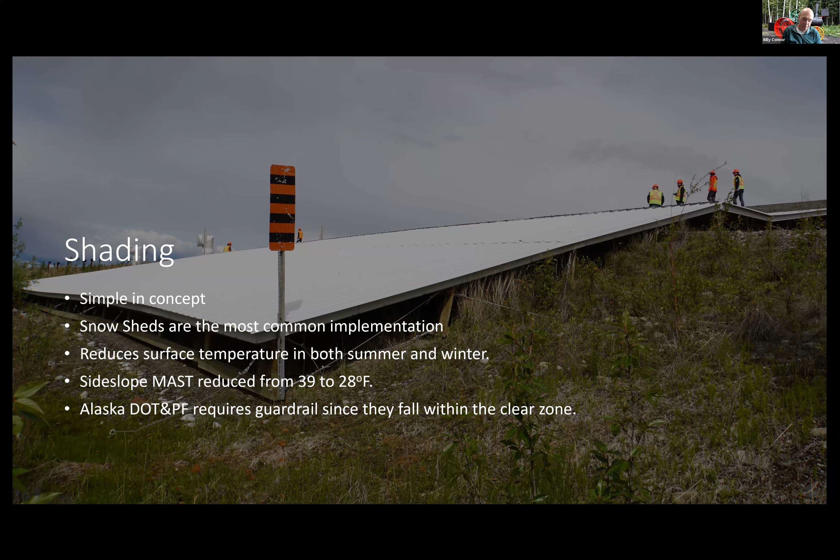Thermosiphons were developed by Erv Long way back in 1956, first used in 1960.

I was just the other day trying to figure out how to explain to a group of high school kids in Point Lay how thermosiphons work. And I came across the water cycle and realized it's exactly the same process as the rain cycle. The sun heats the water, which turns to vapor. It goes up, and as it goes up the air gets cooler, so it condensates and falls back down to the surface as rain.

If you look at the graphic in the lower right, exactly the same thing is happening, except we're using the ground heat to heat the fluid in the thermosiphon. That heats it up, and when the air temperature is low enough, that heat is rejected through the condenser fins, which causes the gases to turn back to liquid and fall back down. The only real difference between these two systems is the fluid, and the pressure inside the vessel is a bit lower, so there's really not much difference.

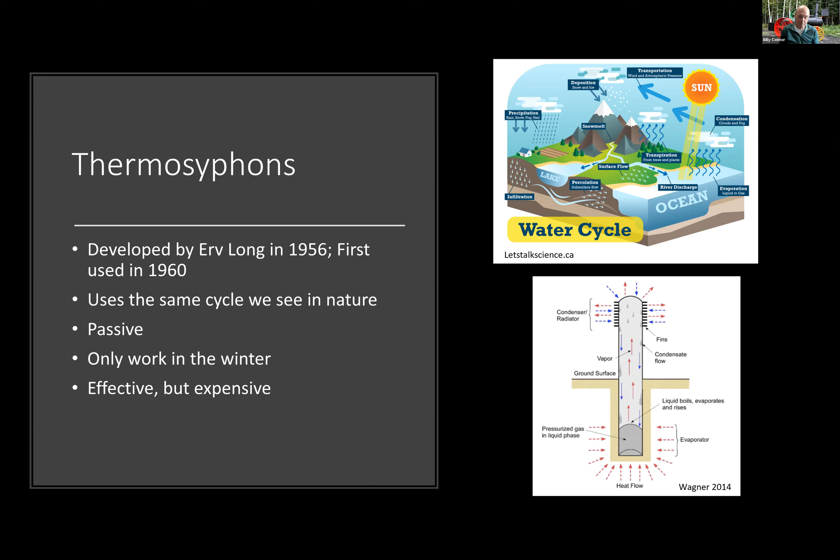They only work in the winter, so that works out really well for us. They're effective, but they're quite expensive. John Zarling has a publication out on that, and there are several others describing the effectiveness of thermosiphons. I point you to that if you really want to know more about those.

There are several types of thermosiphons out there. They all work in exactly the same way, but the configuration of them is slightly different. The vertical one is the ones that we're most familiar with. They're the ones that are used primarily around buildings. They're not too effective for us in roadways, but they're basically a vertical pipe stuck in the ground, and then we have radiators on the top in order to cool them, and they work very well for buildings.

The flat evaporator, that one basically can be going beneath the road, but the evaporator is turned 90 degrees, anywhere from 90 degrees, maybe up to around 60 degrees. They're bent over, and they work very well. One of the reasons that's done is to reduce the issues of getting in the way of sight distance.

The flat loop, basically you put a loop of pipe in the ground and then connect that to an evaporator, and the fluid really goes in a loop. That's all described in more detail in the synthesis.

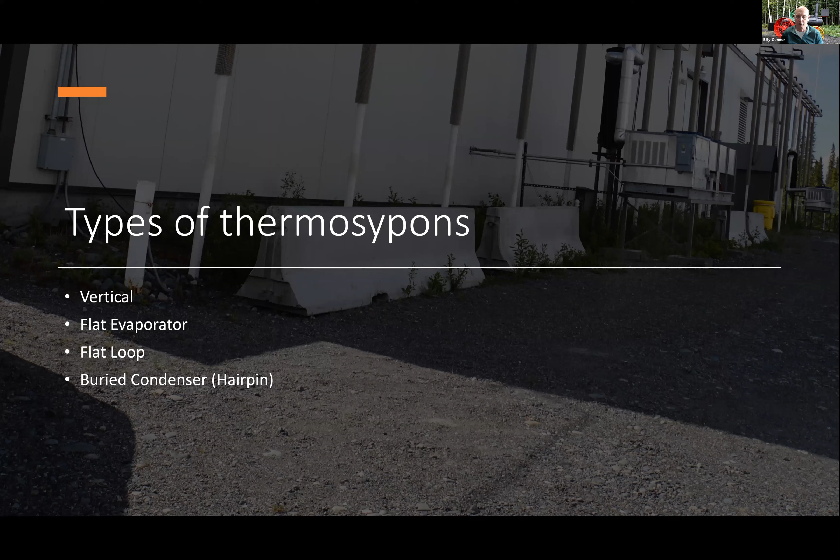And then the buried condenser, sometimes called hairpin thermosiphons, which we have on Thompson Drive. The whole thermosiphon is contained within the roadway. I know that all but 2 of them are working because I went out and looked at the roadway last winter, and right over those thermosiphons, you can see that there's no frost on the roadway. So it's very clear whether they're working or not. But you really have to make sure that you maintain these and make sure that they're working, and recharge them as necessary. Again, much more detail on these types and the description of these are contained within the synthesis.

We're seeing more and more winter construction as we go along, in an effort to reduce the impact of thawing on the permafrost during the construction phase. So a couple of different approaches to this. One is to allow the subgrade to freeze and then apply frozen material. The downside of that, while it's probably one of the less expensive ways of doing winter construction, is poor compaction.

Frozen material just simply does not compact very well. If you're going to do that, try to use low moisture content soil because you'll get better compaction out of that. It's best used in the lower embankments, in the lower elevations where thawing is unlikely, and not up in the structural section. I would not ever use this in the structural section of our embankment.

If you place it in thawed condition, allow it to freeze before the next lift, that works out very well. It is effective, but it is a bit more expensive because the contractor has to haul that material, get it in place, compacted before it freezes. So he's got to really have everything going in his way in order to make that work.

In some cases, for example, if you're in Barrow or in the northern part of the state, that thaw material is going to be essentially impossible to come by, so that's probably not going to work very well for you. And then finally, place frozen material in the lower levels, and then the next summer, continue with conventional construction. That protects the permafrost and also reduces some of the cost.

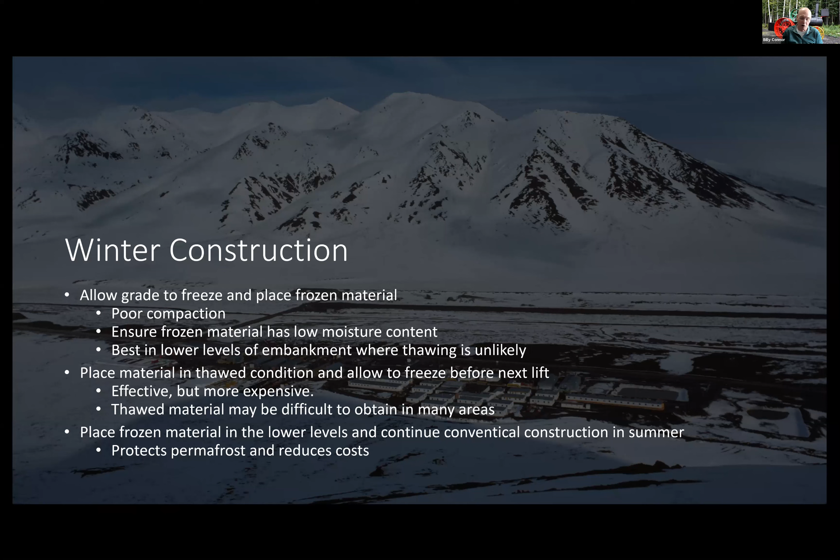So in summary of chapter 5, the first approach is to avoid permafrost. You want to choose your approach, and that decision needs to be made very carefully, because you may be trying to do something that is impossible to do. So pick one of these 4 and base the rest of your design on that, and make sure that you're consistent in what you're doing.

All of these things that I've presented in chapter 5 use current technologies, but they only address localized problems. You're not going to be able to use these technologies for miles and miles and miles of roadway. So in that case, you're going to have to deal with the practicality of thawing permafrost. It's just the nature of the beast. No technique fits all situations. You've got to carefully think about which one fits where you are, and frankly, they're all expensive. So you really need to choose which approach you're going to go after very carefully.

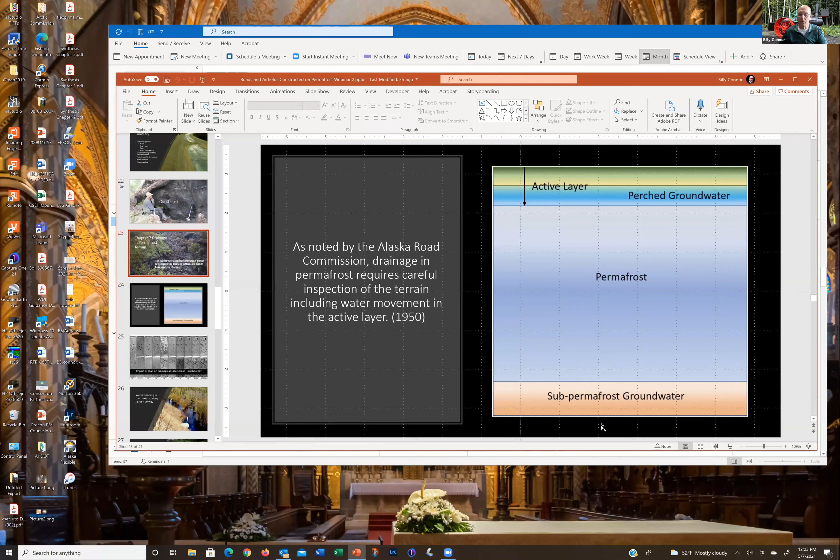Okay, let's talk about drainage a little bit. One thing that I've learned through my many years of dealing with permafrost, the fastest way to damage permafrost terrain is to change the drainage patterns, no matter how small a change.

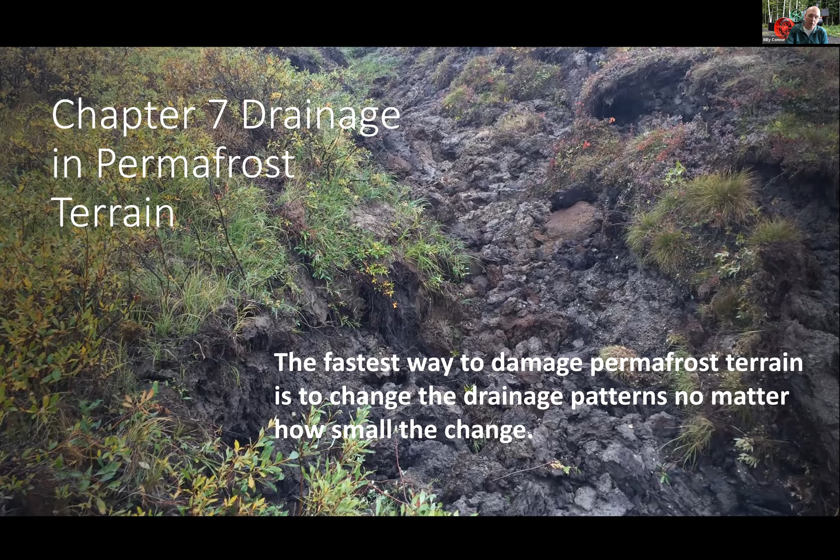So one of the things I always try to teach people is make sure that you account for the water. Here's a graphic showing what the profile of permafrost may be. We have the active layer, and right on the bottom of that active layer, there's often what many call a perched water table, groundwater, that is the water that can't penetrate the permafrost. Then we have the permafrost itself, and below that we may have a sub-permafrost groundwater.

One of the things that happens if you drill a well into that sub-permafrost groundwater, which is often under pressure, you end up with an artesian well coming through the permafrost, which then very rapidly melts the permafrost, allowing the water to come through even faster. Once that gets started, it's very difficult to stop. There's a couple of instances on Farmers Loop where that happened, and the cost of stopping it was tremendously high. So be careful about drilling into that.

There was an incident about 10 years ago now out in Goldstream Valley, which required 20,000 gallons of liquid nitrogen to solve.

Yeah, so it's quite difficult to stop. Interestingly, this has been understood for quite some time. The Alaska Road Commission in the 1950s noted that drainage in permafrost requires careful inspection of the terrain, including water movement in the active layer. So it's been known and discussed for a long time. But unfortunately, even today, many of our designers tend to ignore that perched groundwater and not account for it.

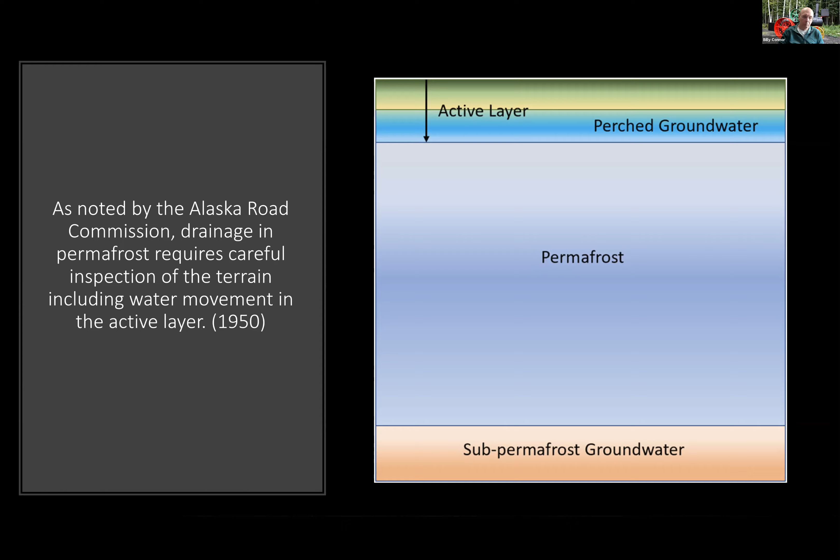It can manifest itself in a number of ways. Simply building a road across the tundra can impact the drainage in that active layer. This is a transect taken at Lake Coleen up at Prudhoe Bay, where the roadway was placed in 1972, and the last one goes through about 2012 or 2013.

You can see the change. The water is flowing from bottom to top, and you can see as time goes along that many of these what were fairly stable looking ground, the ice wedges, are being melted because of the standing water, and as a result of that, it's causing other problems.

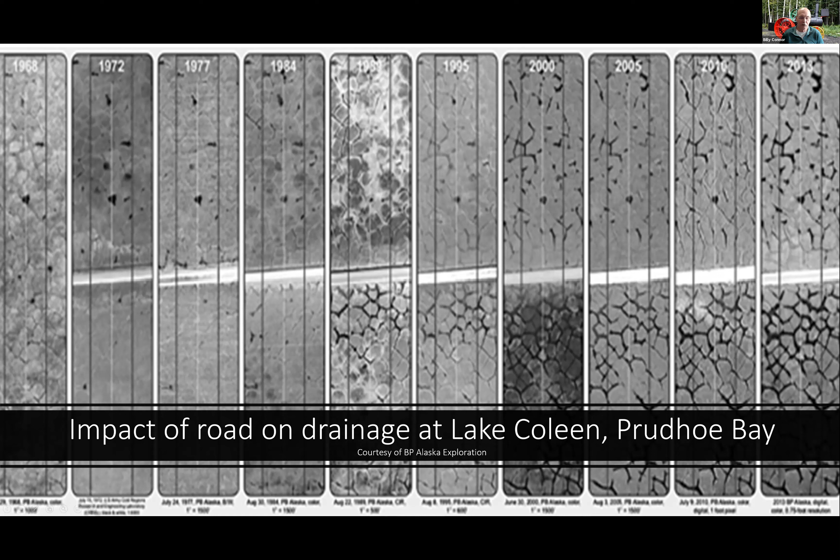So you really want to pay attention to keeping that water moving, especially if something upstream could cause a problem. That does impact the roadway as well, because all that water is now impounded against the roadway. We've talked about this situation where we're getting water ponding and thermokarsting along the toe slopes.

We've all seen that over the years. There's lots of examples of that along our roadways. And as those continue to grow, they end up causing longitudinal cracking in the travel way, and maintenance has to deal with those. So if you can figure out a way to get that water away from there, it's much better to do that.

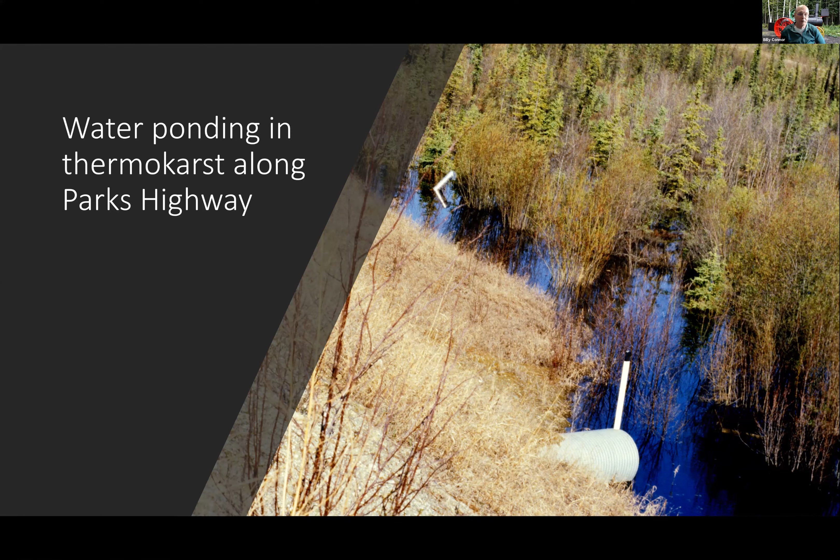It also affects our pipes, our culverts. In this case, there was a thermokarst that started forming upstream in the inlet section because of water flowing through there. As a result, some of the pipe was lost, and the road was actually moved a little bit to the left in order to avoid that thermokarst.

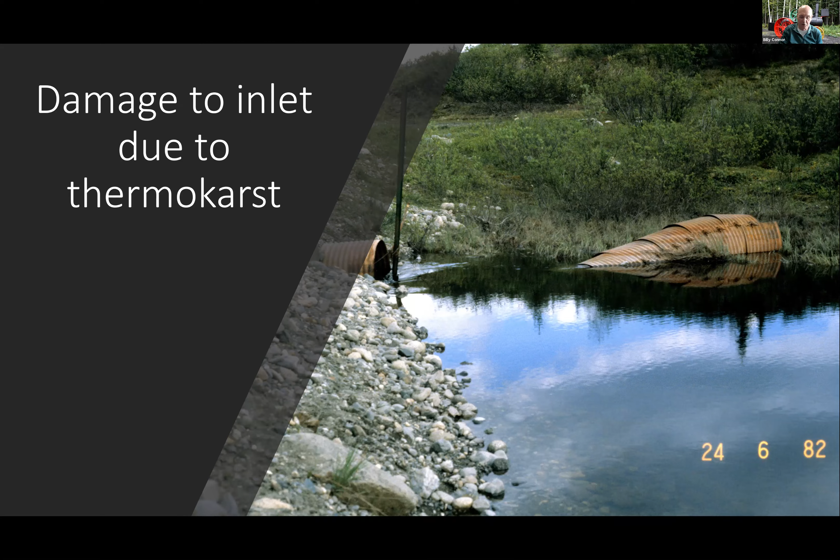There are some things that you can do. One, this was a fairly innovative way of doing it. I saw it used for a while. It's not being used as much now, but simply releasing the water a bit away from the roadway by extending the pipe. One thing to be very careful of is that first section, usually about 20 feet, which you need to embed in the embankment well so that it doesn't get damaged. It certainly works well, and as I say, you can see the water being released there.

That only works well when you have water flowing either just in the spring or you're trying to release water coming in from that perched water table. It does not work well in streams, so don't try this in streams because you can end up with a buoyant failure as a result of that.

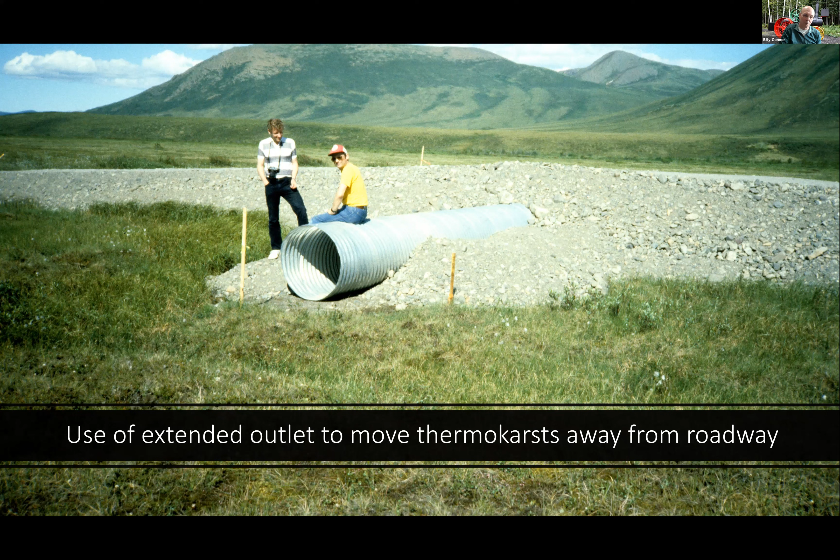Another way that has worked successfully where you have rock is to put some rock there. If you put enough rock, you could end up with a ventilated shoulder, but in this case they didn't. Just putting that rock there helps reduce the amount of thaw that is going there, and certainly helps stabilize that situation and reduces the mechanical erosion that's going on there. That works out pretty well for you.

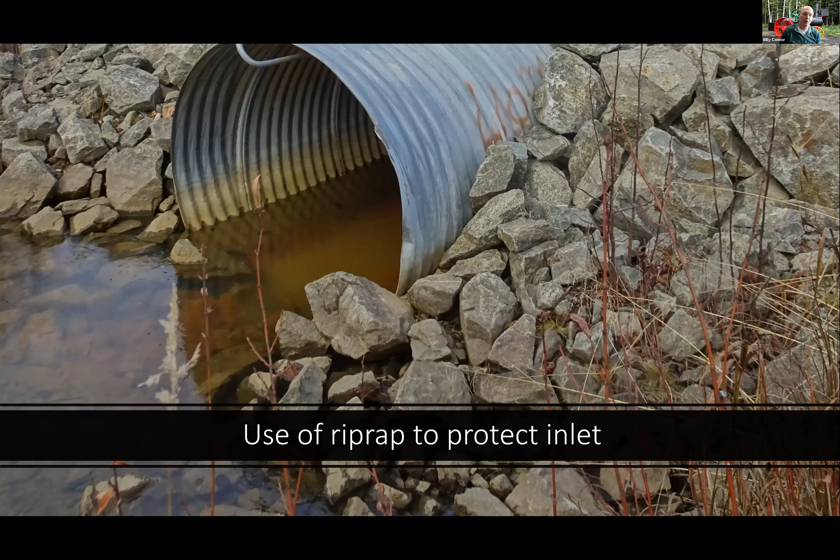There have been a number of people suggesting putting insulation in the culvert. As I monitor that, there have been a few installations where that's been put in, but it's not being used very often. If an established channel and a talik already exists under that channel, the insulation is not going to be of any value to you. So if you've got something like the graphic shown on the right, and you're trying to put a culvert through the roadway to address that, I would not consider insulation because you've already got a talik under there. Putting insulation in, the water is going to continue flowing underneath it, and you could possibly create a worse problem by putting the insulation in there.

But if the water is only going to flow a short period of time in the spring, or the flow is just occasional, then you might get something out of that because the talik hasn't been produced underneath that particular area, and you just got basically that perched water table. If the water exists in that active layer, insulation may be of value there as well.

So be very careful of that. Some of the thermal models may be able to help you there, but be very careful how you put those together and which model you choose, and make sure you check them out, making sure they give you reasonable answers.

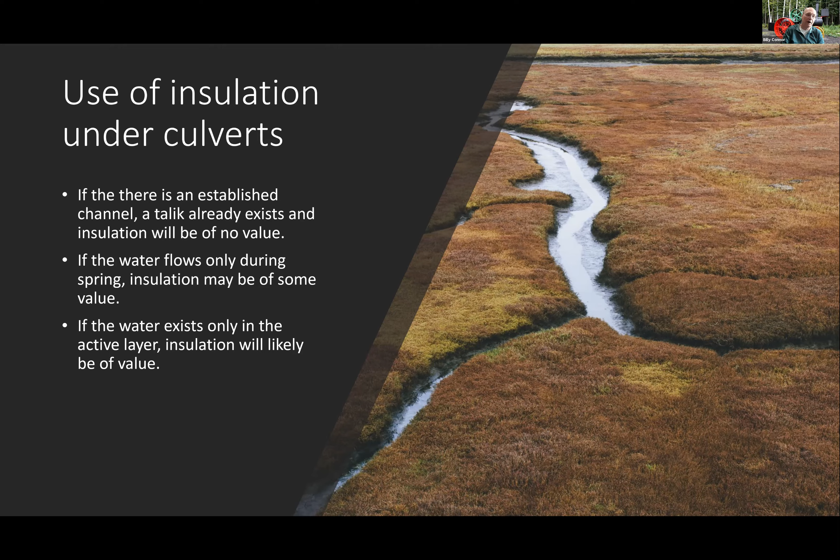Some other thoughts on drainage. One is to use a slightly larger culvert, at least one size larger, to account for thaw settlement and allow your pipe to last a bit longer. I generally suggest using a bit heavier gauge culvert. By the way, I believe the Northern Region now prefers a 36 inch minimum size culvert on continuous permafrost areas.

If you're using a spiral culvert, which is very popular here in Alaska, watch that J seam for strength. I went and looked at all the J seams along the Richardson Highway a number of years ago, and every single one of those J seams that were on permafrost had failed. So we now require that they be welded, and that seems to have fixed the problem. You may want to consider using a multi-plate instead of a welded J-seam for larger culverts. That seems to work.

The last thing I'll leave you with on the drainage issue is to alter the channel alignment only as a last resort. The reason for that is the existing alignment of those streams has a talik beneath it, and if you realign that, it's got to reform that talik, and you're probably going to get a lot of thaw consolidation as part of that.

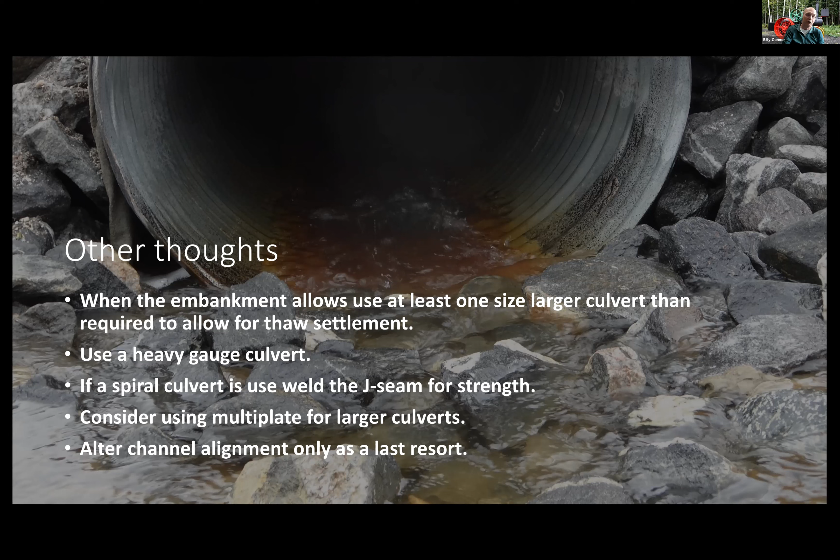I'll answer questions on this at the end so we can get through the other two sections before that. So let's talk a little bit about construction and maintenance. If you remember nothing else about these two chapters, remember: small mistakes, big consequences, and consequences that cannot be undone. Again, this is a similar photo that I showed you earlier.

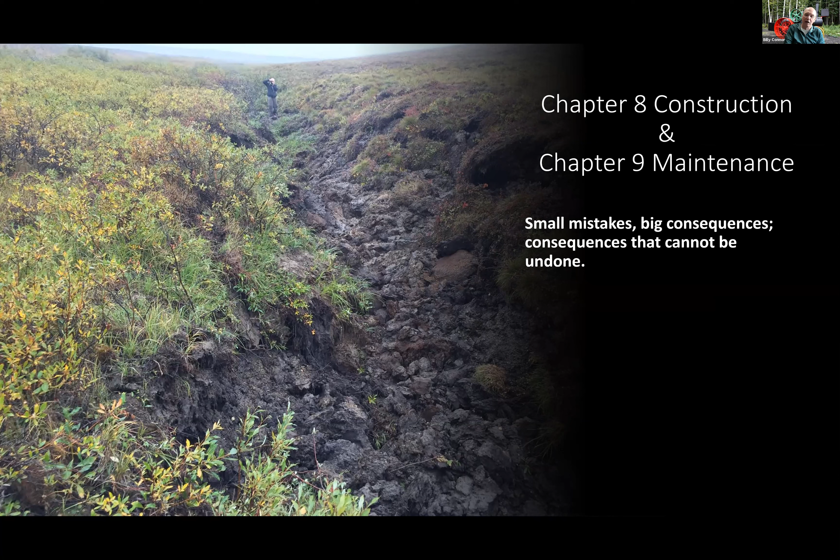The chances of undoing the damage done by that little thin fiber optic cable - it's just not going to happen. It's going to be there for pretty much forever. Even if vegetation does get going again, that drainage channel is going to be there. So really be careful about anything you're going to do, especially anything outside of the roadway prism.

Minimize disturbance. Simply clearing the trees - and this was done by Linell way back in 1973, where he went out to the CRREL permafrost site on Farmers Loop - and simply clearing the trees, he found it increased the thaw consolidation by almost 6 feet over 5 years, compared to undisturbed areas. Clearing the vegetation in its entirety resulted in 22 feet of thaw. So you can see that the more you disturb that permafrost, the greater the results, and the likelihood of repairing that becomes almost nil.

It's really important that you pay attention to permits, and I should say beyond that, the design of the roadway prism, because small mistakes can add up very quickly. So I suggest that everyone, including equipment operators, know about the provisions of the permits and regulations that affect their work, and make sure they adhere to those at all times.

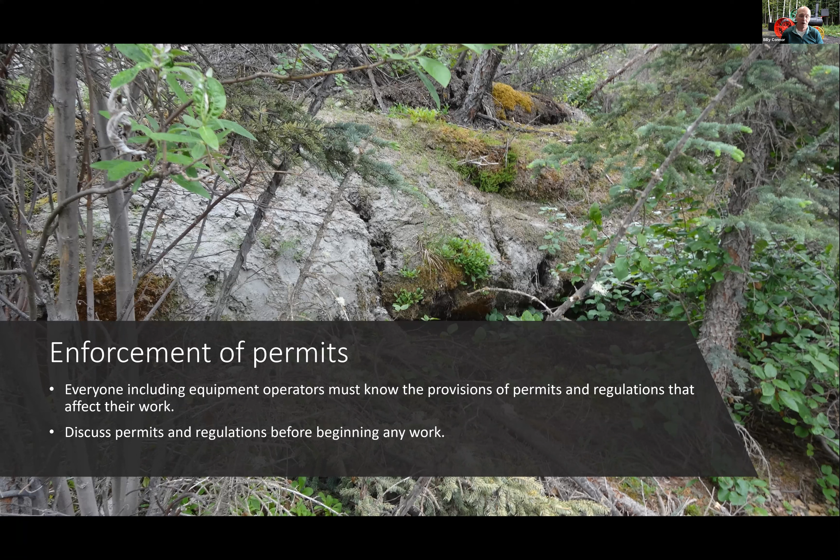Discuss the permits and regulations before beginning any work. So if you're going to start something new, take the time to sit down with the contractor, the state personnel, as well as the equipment operators, to make sure everyone understands what those permits and regulations say.

Managing unforeseen ice - it happens all the time, especially here in the northern region. We run into ice that was totally unexpected, or more of it than we anticipated. In general, you probably want to stop the work and contact the materials engineer to look at that quickly before you continue on. Specification 108, 106 for state folks is what controls that. Then work with the materials engineer and the contractor, and you definitely want the contractor involved in the discussion, because they're going to have to effect any changes that you make.

First thing you want to do is stabilize the situation. You don't want to let that permafrost continue thawing. I've seen some results of that. In one case, DOT made a cut in the roadway. All of that material melted, thawed, ran down the hill, and completely inundated the landowner at the bottom of the hill with gravel.

And a lawsuit ensued, and the state spent a lot of money paying for that. In the end, it actually improved the quality of the land he had, but he got the money anyway.

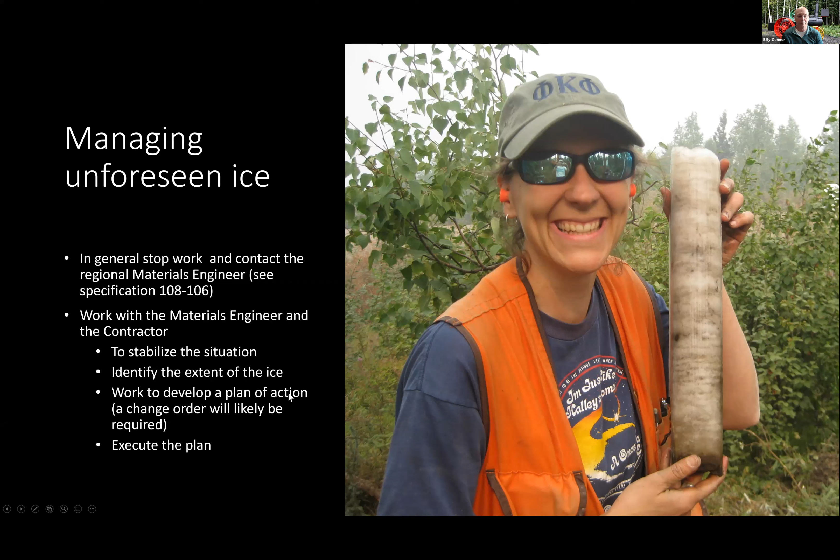We also, for the M&O folks especially, want to monitor the drainage patterns. If you start seeing the drainage pattern causing an issue, get with the regional hydrologist, and I'd probably say the materials engineer as well, to look for changes in that. It may require some backfilling, it may require additional culverts, whatever that may be. Thermokarst ponds need to be corrected or filled in order to do that.

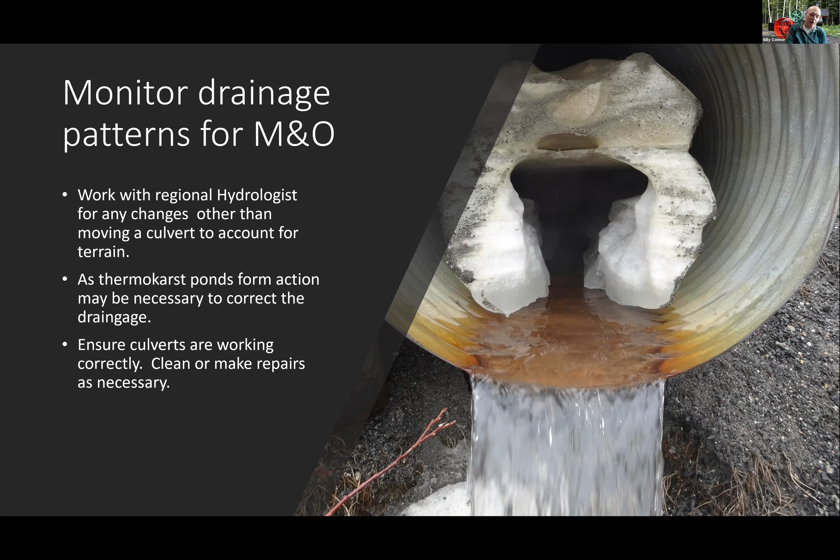The other thing is, for the M&O folks, make sure all your culverts are working correctly. I suggest every 2 or 3 years taking a good close look at them, clean or make repairs as necessary to ensure they're working properly. The last thing we want to do is impound water uphill of those culverts and create larger thermokarsts.

When we fill longitudinal cracks and thermokarsts, I'd suggest avoiding pea gravel or sand. It's easy, it pours in there very nicely, but the problem is it still allows water to continue on. I know some of the folks I talked to up on the Dalton were doing that - putting pea gravel in there because it was easy, and water would flow in there and continue to melt the ice wedge.

What you really want to do is stop the water from flowing down into the permafrost. So you probably want to use something more like silt, fine grain material, to reduce the induction of water. People have used a slurry, but you want to keep the water to a minimum - you don't want to add a lot of hot water as part of that. But a little bit to help get the silt in there is probably okay.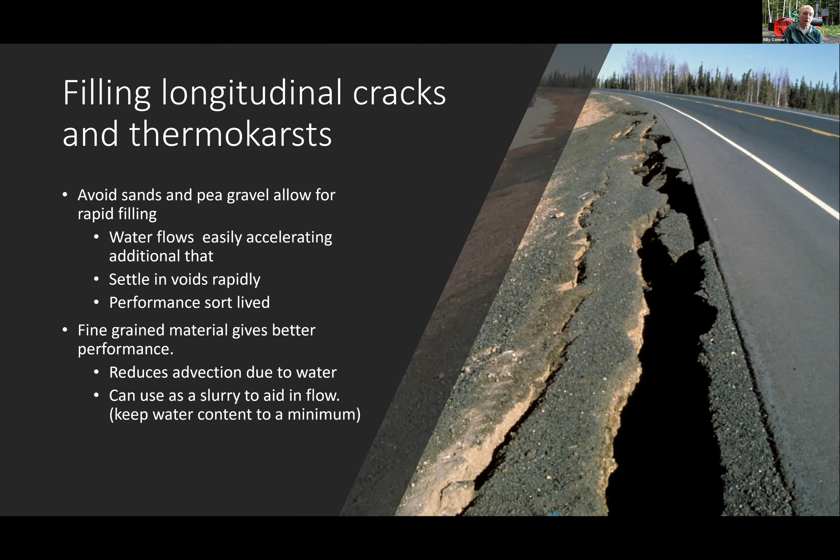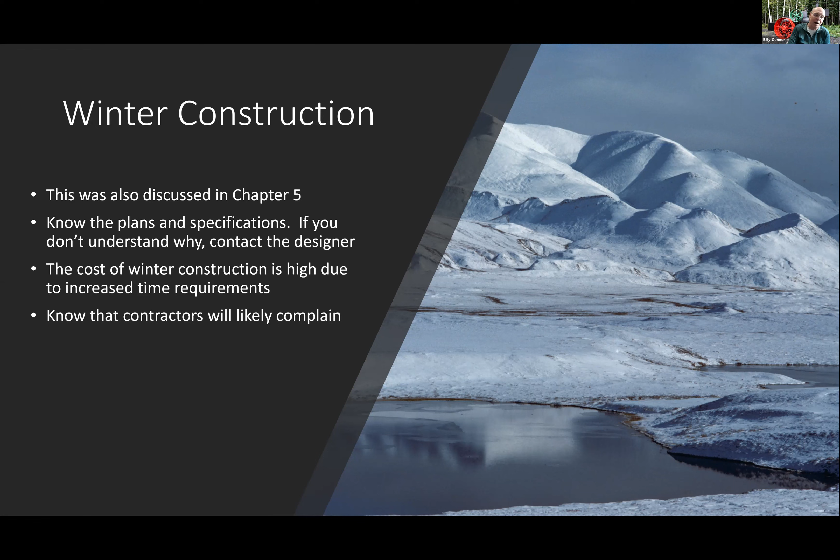For the M&O folks, just a quick comment on winter construction - I think generally you're better off if you can start early in the spring and complete things, because you have a better chance of trapping the winter's cold in the ground than if you do it in the fall. So I'd vote for spring construction, early spring construction, whenever possible. In some cases it becomes difficult to get material, so you've got to take that into account as well.

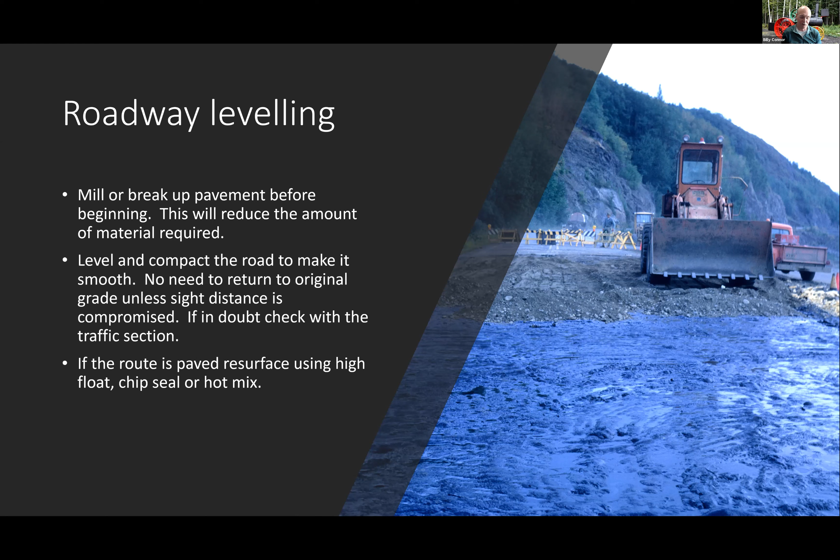If the route is paved, you can use a number of different materials: high float, chip seals, or hot mix. That depends on where you are and what's the most cost-effective means of doing it. If it's something that's going to occur on an annual or even biennial rotation, you probably don't want to put a very expensive surface on there because it's not going to last very long.

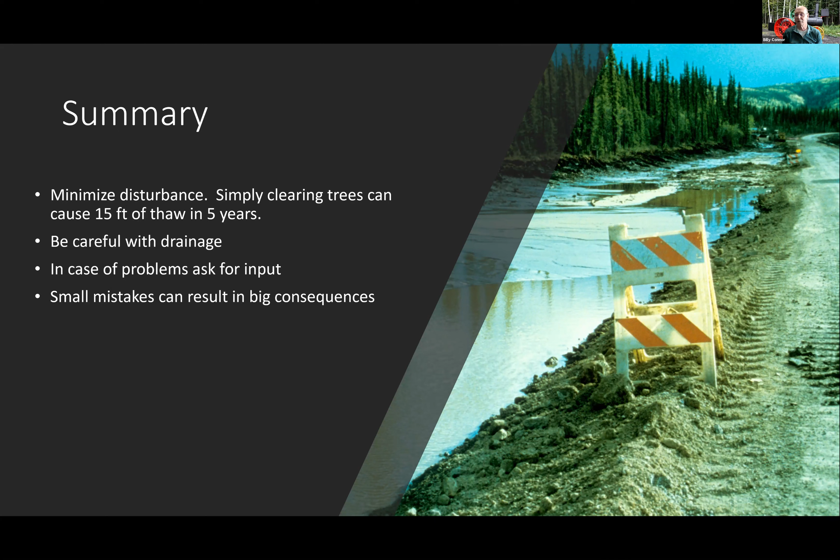So with that, I'll stop sharing my screen and be happy to answer any questions.

Henry Cole said to make sure the thaw pipes are functioning correctly—they're essential. I fully agree with that. A bentonite slurry can do it; I've used bentonite for that purpose on a few occasions. It's easy to ship, but sometimes pretty expensive. So that's one way to do it, Jeff. I've also used just regular silt and had good success with that.

Heather's indicating that two thaw pipes may be better for pipes over 4 feet. The key to thaw pipes is getting the water thawing, and once you get the water thawing, it will do the rest for you. Whether you use one or two, a lot of people use two just so they have a backup. Jeff was saying excavating ice-rich permafrost is much easier when it's cold, to stay frozen. I fully agree, for more than one reason: one, it's easier, but second, if you do it in the cold, you're also not heating it up and thawing it and letting that get away from you.